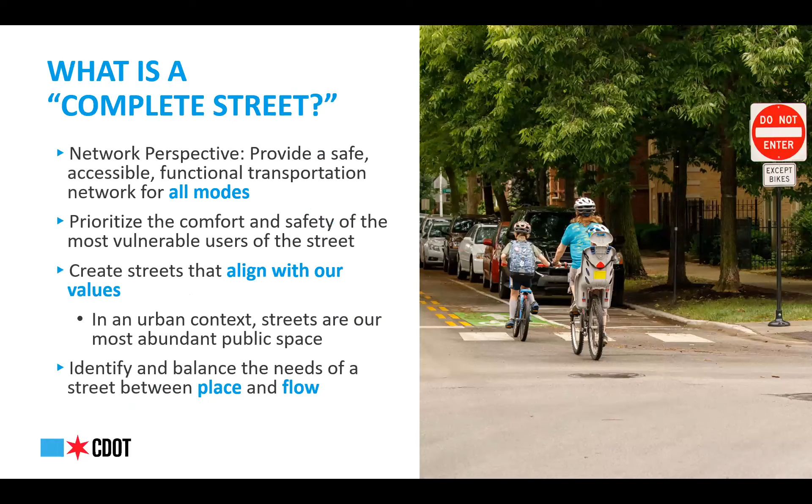So really important to note that even on your most flowy of streets, you still need to provide safe and functional facilities for all modes. And again, that doesn't mean that every street needs a protected bike lane. That goes back to the network perspective. But there should be an alternative that parallels a street if that's a desired path for people who are biking.

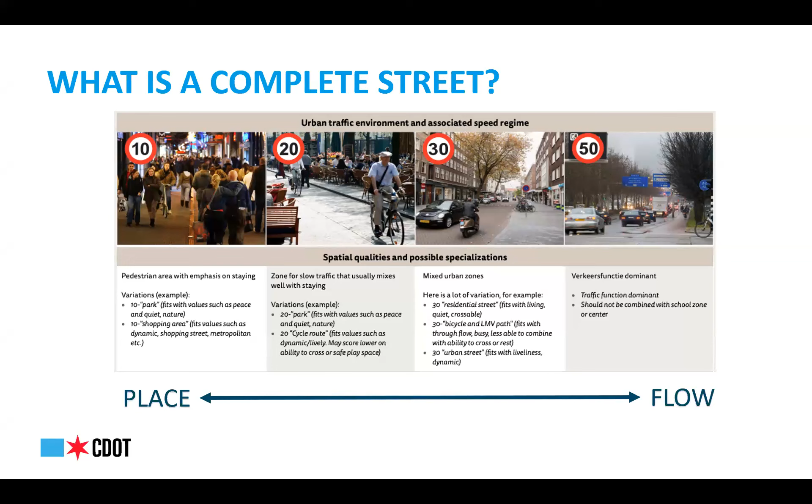So again, wanted to touch on the most important piece of all of this, which is safety, and a big reason that we are all here. Traffic fatalities and serious injuries are absolutely an epidemic in the United States right now. 40,000 people are killed by motor vehicles each year in the United States. That's data from the National Safety Council. On Chicago streets in particular, these numbers are a little outdated. This has gone up during the pandemic, back down, so it's right about where it is. But we see 80,000 crashes, 170 or more fatalities.

And something to really highlight is that while bicyclist mode share is only 1 or 2%, bicyclists and pedestrians make up 65 fatalities out of that 170. So you're talking about a third of fatalities from a mode share that's only 1 or 2%, which really highlights the vulnerability of those road users and the importance of focusing on the most vulnerable users of our street when we're designing.

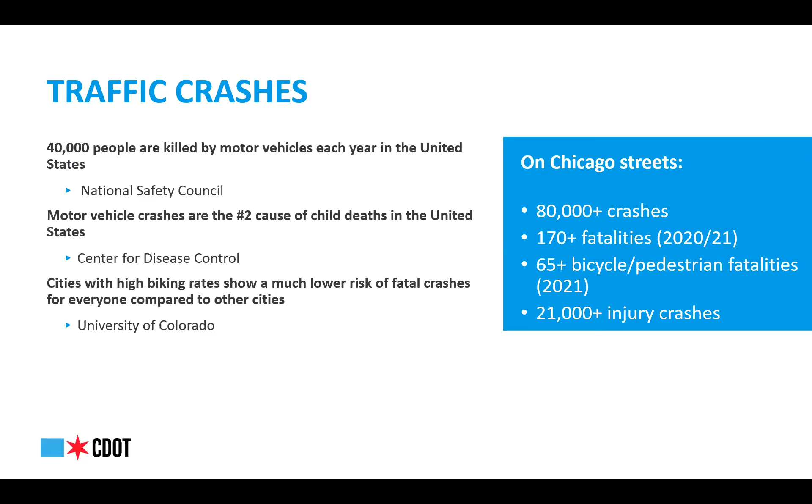But at 30 miles an hour, only 10 miles an hour faster, the odds of survival go down to only 55%. And when hit by a vehicle going 40 miles an hour, so only 10 miles an hour faster than that, your odds of surviving a crash are only 15%. Your odds of fatality are 85%.

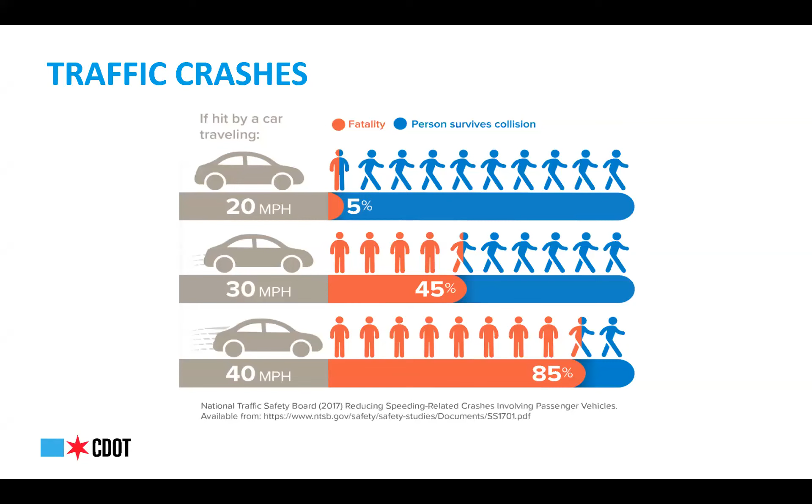And this is ITE, this is an engineering group, so I thought I could put at least one equation in here, some charts. But I really think that this, as you look at it and dig into it, really highlights why speed is so crucial and such a huge factor in the risk of fatality and serious injury. And, this is from the Good Street document as well, it helps understand the different families of modes and how they fit together, and how separating modes of vastly different mass and speed is so critical to street safety.

So kinetic energy, if you remember from physics class, is energy of a body in motion, right? And kinetic energy is directly related to the amount of force that a body has available to it to transfer in a crash. It's directly related to the risk of fatality and serious injury. And it goes up linearly with mass and exponentially with velocity. So the more massive a body is, the larger a car is.

And this is a huge issue, and one that on the street design side, we have less of an ability to control, as electric vehicles are great for a lot of reasons, but they're also much heavier than standard vehicles because these batteries are so huge and massive. And so vehicles are getting heavier even as they don't get bigger in size. Vehicles are also getting bigger in size. People are buying more SUVs, more trucks.

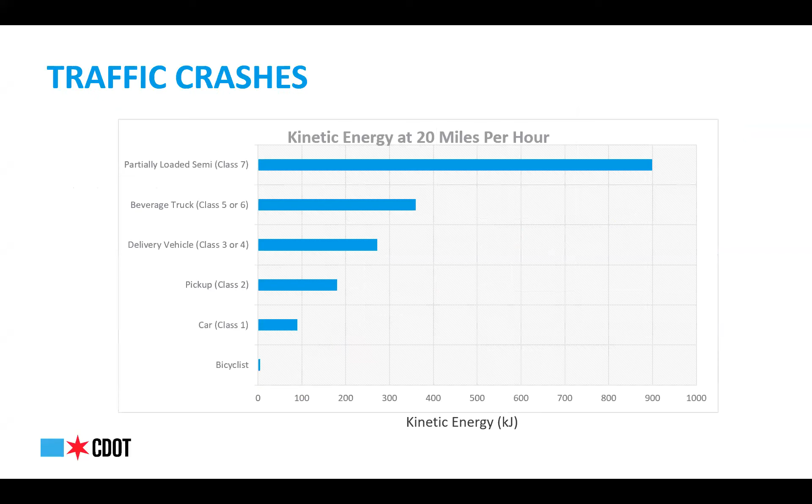So they are entirely different users and entirely different categories on our street, and we need to treat them that way. Again, both users deserve that safe, functional, accessible transportation system, but you cannot expect users of such different classes to be able to have a safe, efficient, accessible facility in the exact same way. It has to look different.

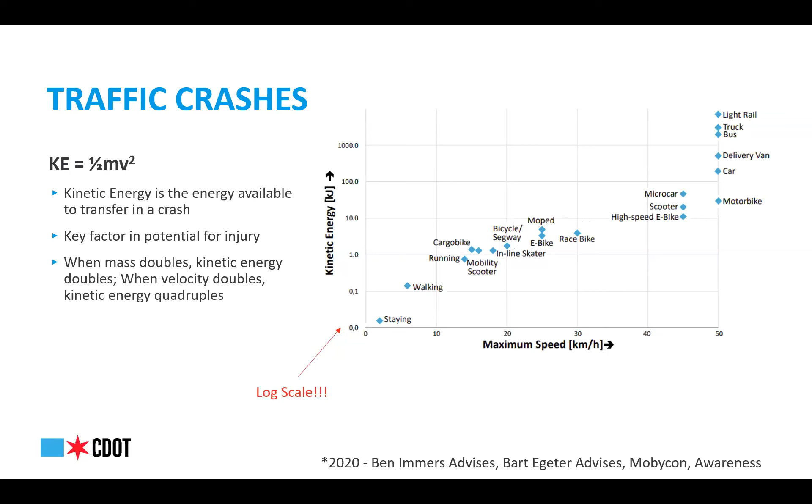Places where you're in conflict with pedestrians or bicyclists or other users of the street. And so we do that with raised intersections, or raised crosswalks, or the trusty old speed hump, which doesn't get enough appreciation, right? Very effective at doing what it does.

We can also do that with horizontal deflection, changes to horizontal alignment. So forcing vehicles to take tight turns around a traffic circle is going to slow them down. Chicanes, forcing you to shift to the left and to the right while you're driving on what otherwise would be a straightaway that makes you want to just hit the gas. Curb extensions that visually narrow the street and help encourage slower speeds and also shorten crossing distances for pedestrians.

And something, I saw Sid just walked in, he's worked a lot with us on this, but left turn traffic calming, which we've also referred to as a hardened center line. This forces left turning vehicles to take turns at a much tighter radius and reduces the conflict zone between pedestrians and left turning vehicles and increases visibility of pedestrians in the crosswalk as well.

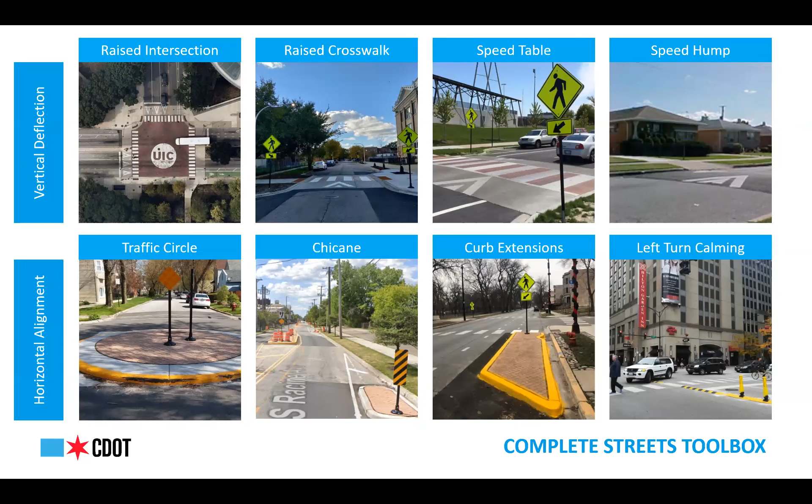And again, some of our speed feedback signs, or we also have speed cameras in certain locations, locations where otherwise with the design we're not able to narrow the visual field, or there's long space between crosswalks and control, whether it's signals or stop control, where it just encourages high speeds. That's where sometimes speed feedback signs or lowering the speed limit can be really impactful, in lieu of other improvements that might not be possible on the street.

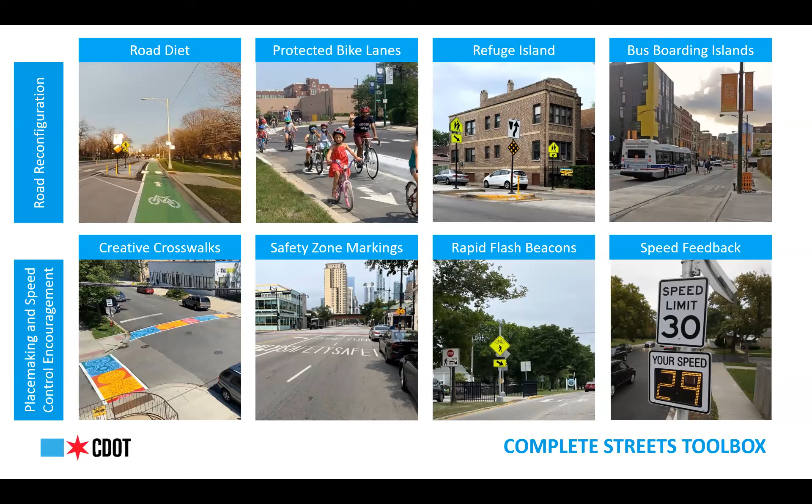So that's the intro on that. Any questions just off the bat on there, kind of the broad pictures? We haven't gotten into the details yet, but any questions on any of that?

All right, so let's roll on to kind of celebrating what we've done for 2023. I've got a couple of things I'll talk about and then turn it over to some of the folks on our team. So one thing I absolutely wanted to highlight, because this has been a crucial, huge push for our team over the past 2 years, is the upgrade of existing protected bike lanes that were originally installed just with flexible delineators in the bike lane buffer.

2 years ago, an initiative with the previous commissioner began to upgrade every single existing protected bike lane to curb barrier protection. And we are well on our way to completing that goal in what really has been a Herculean effort that is really unique to the city of Chicago. Other cities are starting to do this, but the quantity that we have done and the speed with which we've done it has been really, really amazing. And I just say thank you to our whole team and all the consultants who have worked on this. Many people in this room have probably touched some of these projects.

If you need me to pause, I can for the echo.

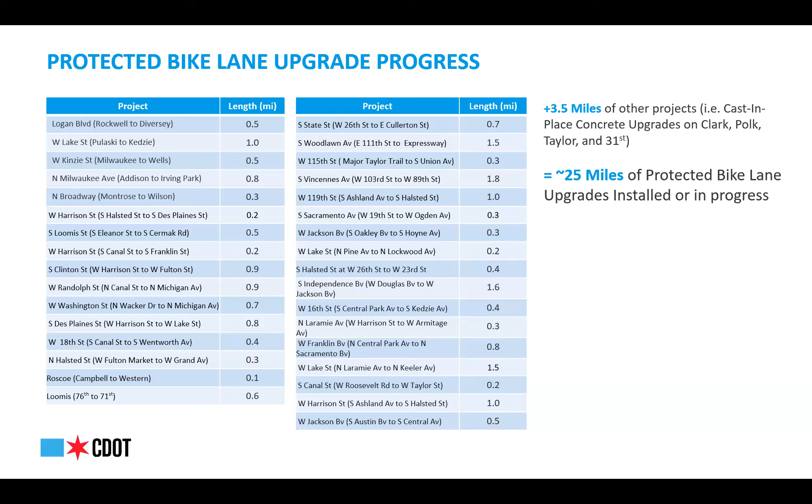So really this detail grew from conversations with other cities through NACTO groups, and then a little bit of trial and error on piloting. You see kind of our first design for precast curb.

We want to do something that we could have a single mold off the shelf and throw it out in the street really quickly and start evaluating. So the first 3 or 4 projects that we installed were installed with this type 3 curb pilot. I won't get into all the details, but we sort of refined the design over time.

You can see the high and wide drainage slot with a little bit of a thin shelf of concrete at the top of that slot. We found that if these were to fail or crack, that was where it was happening. And the most force that these are experiencing happens when they're installed and they're on the forklift. And so it was through that we redesigned these slightly, brought up this taper.

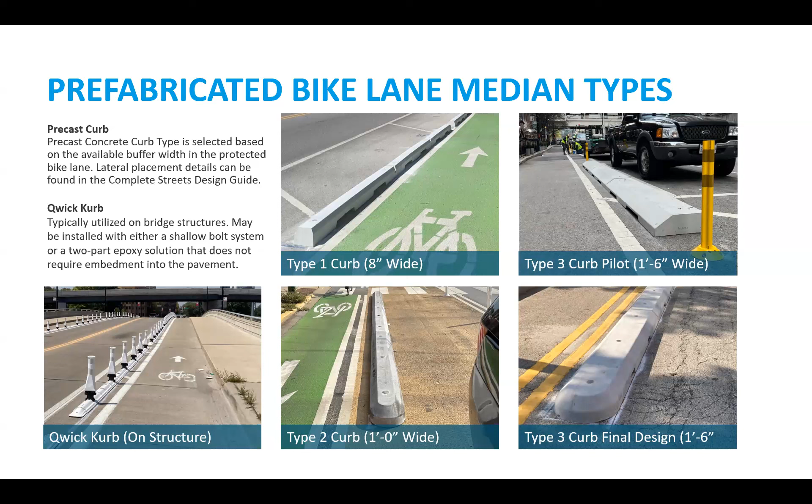They're not made to just be removed and replaced over and over again, right? So once or twice might work, but if they're damaged, they would need to be replaced if there's any utility work going on. And we have details for these that are available for people to use as needed.

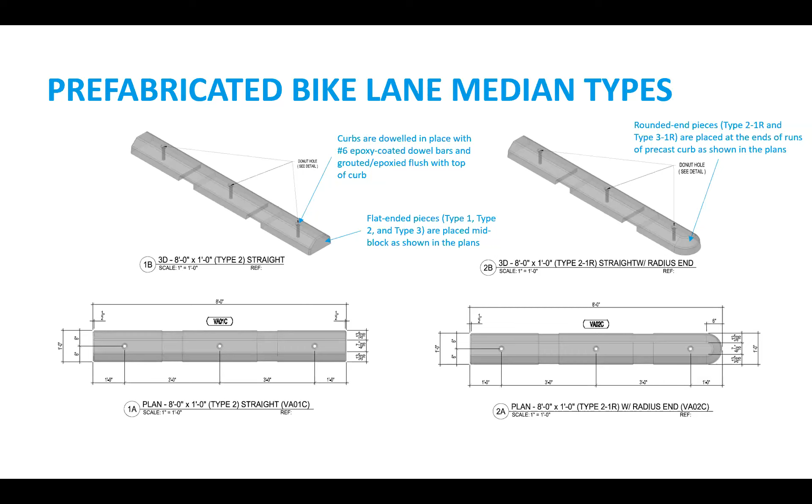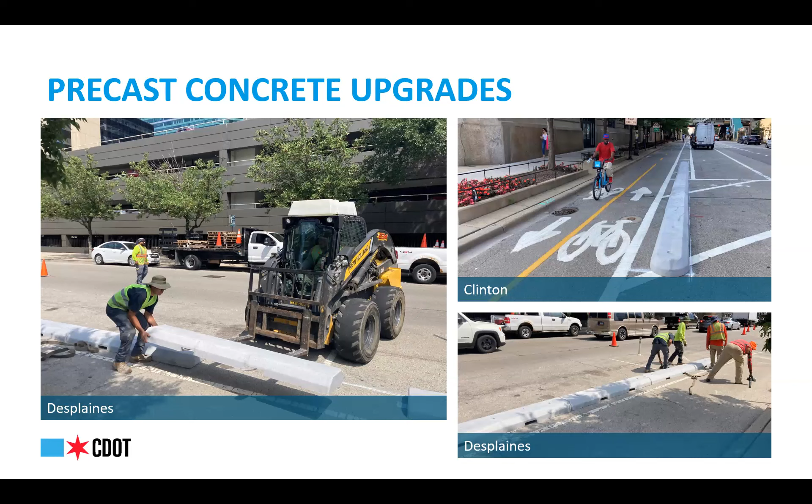And then I'll hand it over to Gina here to talk a little bit about some of the new projects and new protected bike lanes. Sounds good. All right, so as Kurt mentioned, we used precast a lot this year and last year to upgrade already existing protected bike lanes, but we also actually used precast to install brand new bike lanes this year. One of those being Kedzie Diversey to Elston.

What we did was swap the parking and the bike lane, so the bike lane is now curbside. And as Kurt was talking about before, our biggest effort is speed management. You can put up speed limit signs all you want, but they often get ignored. So the way to slow people down through pedestrian and safety enhancements is also to visually narrow the street. So by putting the parking lanes on the inside, it forces people to slow down that way.

We also did end up signing Kedzie as 20 miles per hour. And since we've done this project, we've already seen a 90% reduction in people going over 30 miles per hour, which has been huge to see. And there were also other pedestrian enhancements. There were paint and post bump outs, raised crossings through here as well. Kedzie was really important to have 2 major connections along the corridor, one of those being to Belmont, which Colleen will talk about in a little bit.

And then the other one was Wellington from Kimball to Kedzie, as you see on the bottom right here. This one is a neighborhood greenway that has a contraflow lane and a former slip lane that was converted into a paint and post bump out. And that connects you between Kimball and Kedzie.

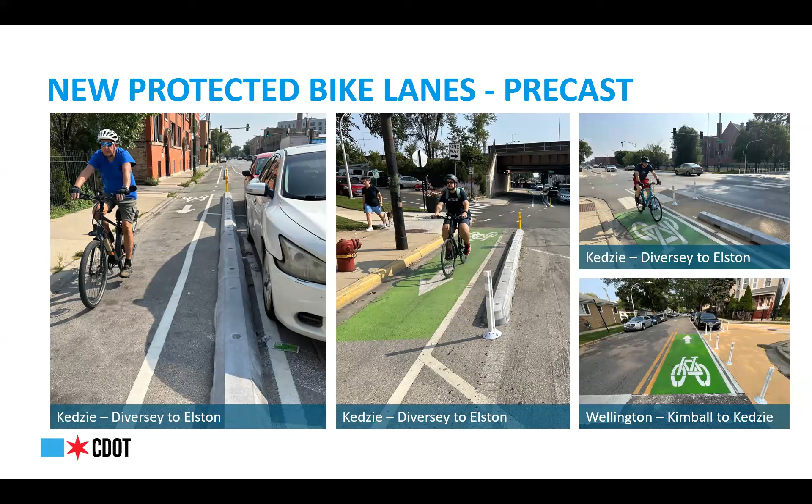And then another precast new project we did was on Augusta from Western to Milwaukee with an off-street connection to Elston. This was our pilot for a 42-foot wide roadway with parking protected bike lanes on both sides of the street. And we used type 1 precast concrete, the narrowest one, as Kurt mentioned. This included a reduction of speed to 20 miles per hour. Almost every unsignalized intersection has paint and post bump outs, and there's other enhancements on the street. This was a priority of ours because there are multiple schools and daycares along the corridor in this section.

Last year in 2022, our team did observations along the corridor, but especially at these schools and daycares, and found a ton of issues with double parking that was causing people to swerve around the parked cars, causing visibility issues, causing a lot of safety issues. And since then, after observations now that the street is constructed, we see virtually no double parking. We've seen a lot lower speeds, and it's been a huge improvement. So we're really excited about this one.

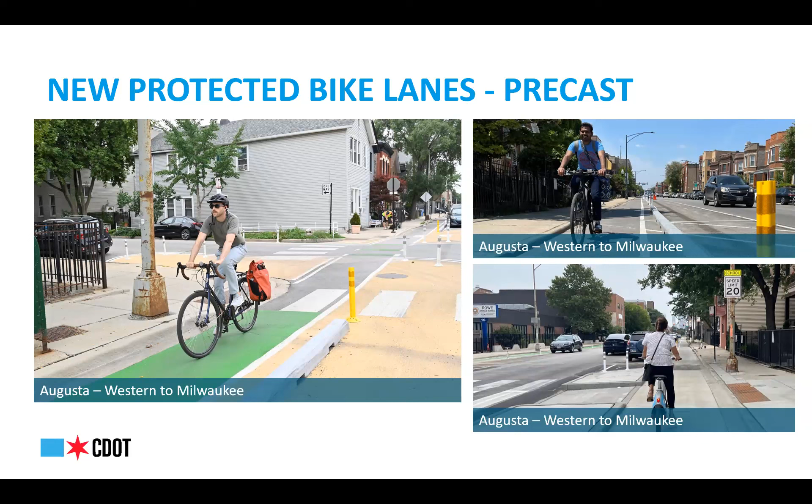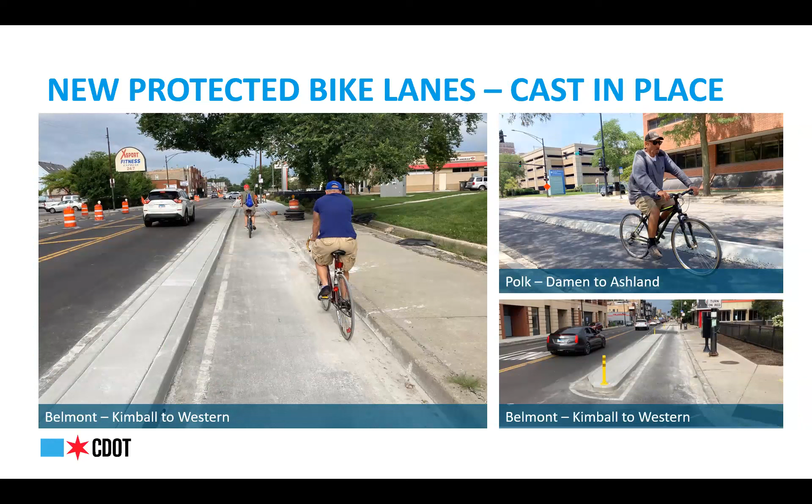We've also done a lot of rapid delivery pedestrian safety projects. Kurt referred to it earlier, and Sid can answer some questions at the end more about that. He's in the back. We've done a lot of paint and post bump outs throughout the city, both mid-block and at intersections. And we've also done left turn traffic calming through the use of rubber speed bumps and Qwick Kurb. Going forward, we'll be using more rubber speed bumps than the combination with Qwick Kurb. And in 2024, we're going to do a lot of observations at these locations to see if there's anything we can improve on.

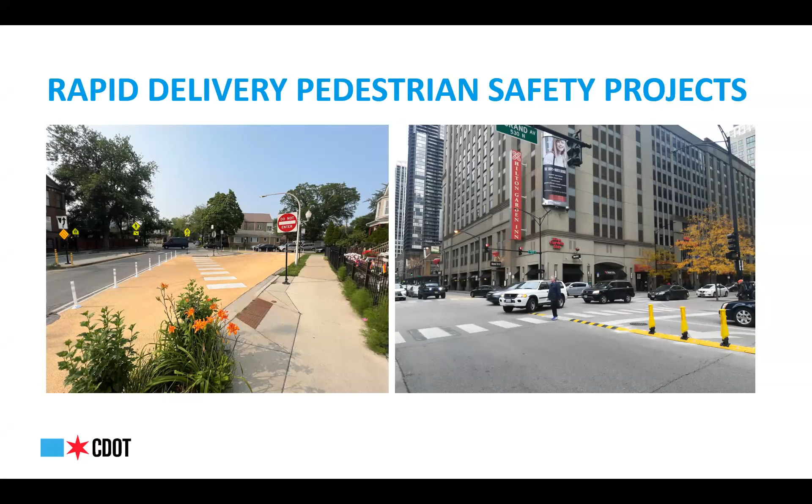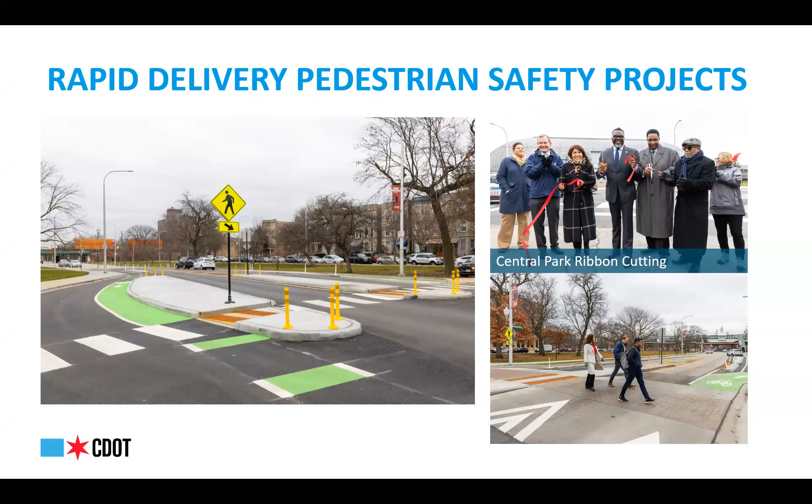Just on Monday, we had a ribbon cutting with the mayor and our team for Central Park. It was pedestrian and bicycle enhancements in the Garfield Park area on Central Park. And this included a raised crosswalk, connected bike lanes, refuge islands, more enhancements. It was very successful, and that area gets used by so many tourists, and there's so many people going through to see the conservatory and the park. And so this was very successful, and we're excited to get this one in as well. And I'll hand it over to Colleen to talk about Belmont.

All right, so Belmont is a project that our team has been working on and focusing on for the last 2 years. There were a lot of things in the existing condition on Belmont that made it stick out as a corridor in need of improvement, including its classification as a Vision Zero high crash corridor, its complex intersections, high speeds, and uncontrolled crossings. However, there was a lot to gain if we were able to make major improvements on Belmont. The River Run Trail connection lets out on Belmont, and the possibility of providing an east-west connection for bikes to get over the river, considering the nearest ones were pretty far away, would be major improvements to this corridor if we were able to transform the street.

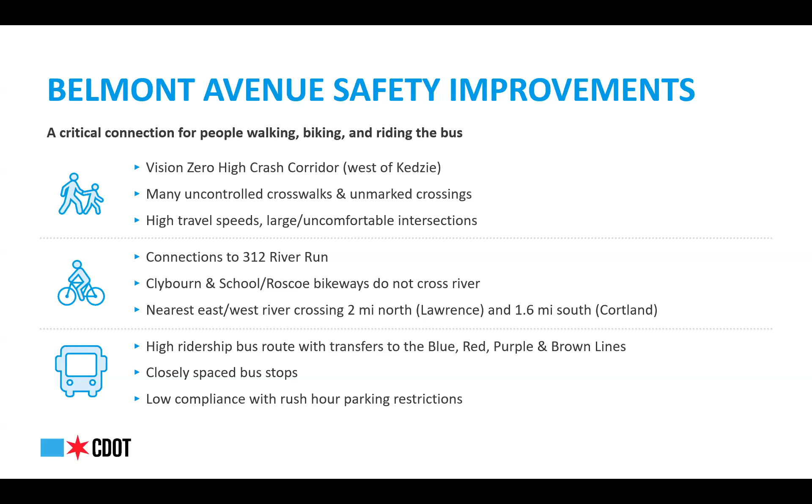And another challenge was that Belmont at Kedzie is underneath the Kennedy Expressway. So not only is it dark, but there's also a lot of cars entering and exiting the highway at high rates of speed.

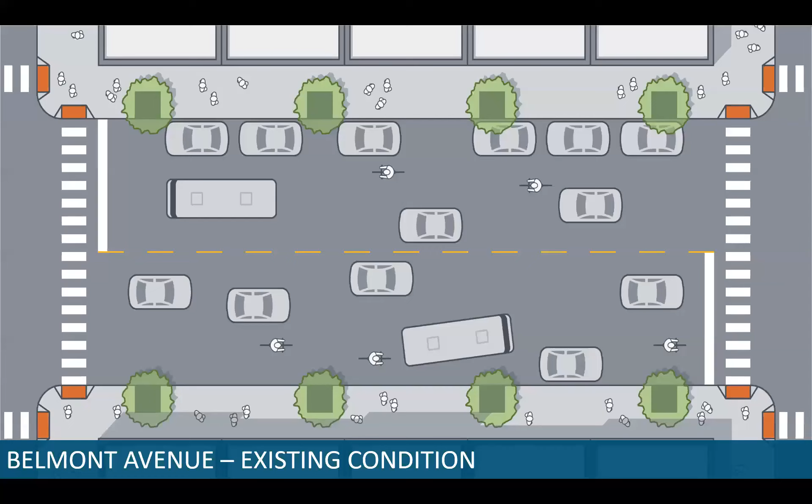So the existing cross-section of Belmont is 51 feet, and it's pretty much an undelineated space shared by bikes, cars, and buses. And we were able to transform it into a more complete street where bikes, buses, cars, and pedestrians are better served. There are concrete end caps and protected curbside bike lanes that help separate bike lanes fully from motor vehicle traffic. There are bus boarding islands allowing pedestrians to board the bus and encouraging slower speeds as cars wait behind these buses as they load and unload.

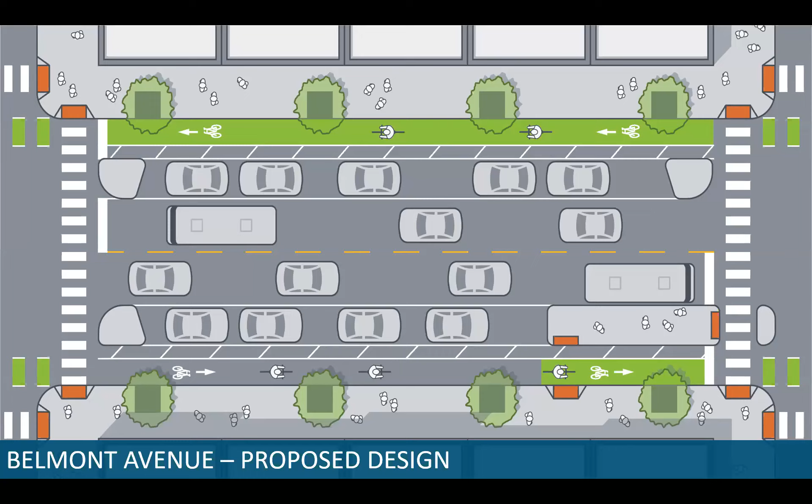Also, we have fewer and narrower travel lanes for cars that encourage slower and more careful driving, as well as actually lowering the speed limit from 30 miles an hour to 20 miles an hour.

Like I mentioned before, Belmont and Kedzie is underneath the Kennedy Expressway, so it's dark, it's busy, and it's confusing as a car trying to get through an intersection this large, let alone a bike. Also, as Gina just mentioned, Kedzie was upgraded to concrete protected bike lanes. So this was a perfect candidate for us to implement the first fully protected intersection in Chicago. There are concrete end caps and full stretches of curb that fully separate bikes from motor vehicle traffic.

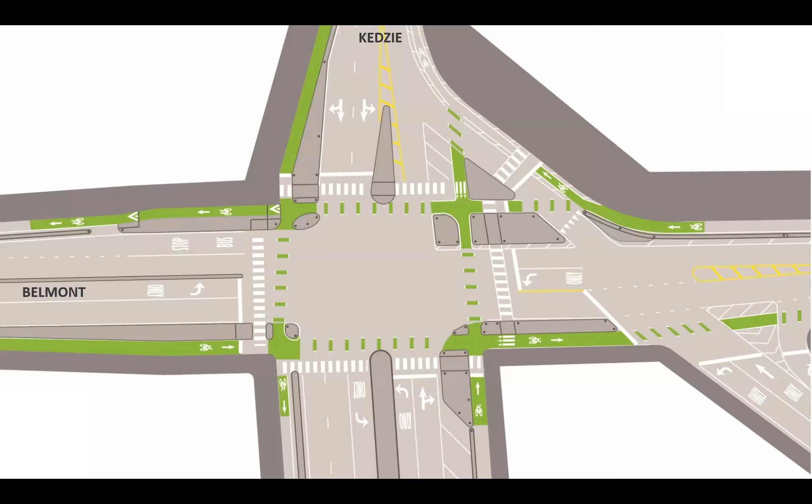And I want to point out that it was really important for us to maintain this as a connection, because an intersection this large to a less confident bicyclist might make the difference from them choosing to use Belmont at all. So we have seen a lot of success, and also a lot of people interested in us doing more of these treatments in the future.

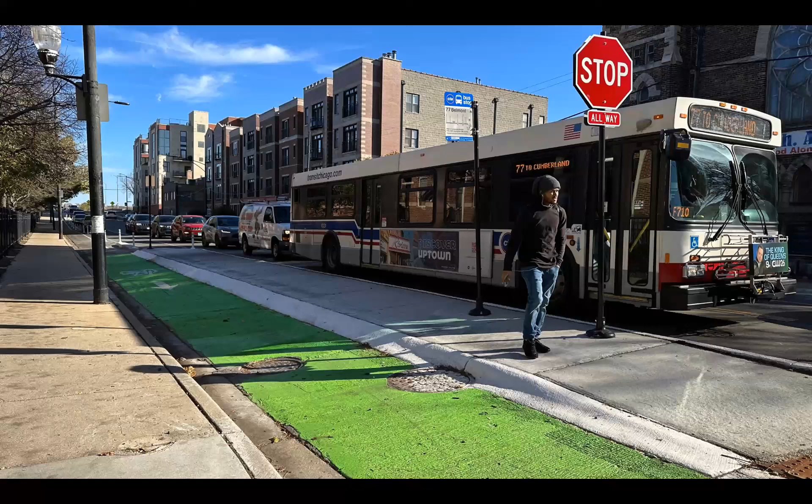We implemented about 7 bus boarding islands throughout the corridor on Belmont. And this provides pedestrians a space to wait for the buses, but it also has the secondary benefit of reducing the pedestrian crossing distance over that 51 total feet of Belmont. Also, I'd like to point out in this picture, on the bike lane side, the curb for the bus boarding island is mountable, which makes things easier for our maintenance equipment like snowplows to get through.

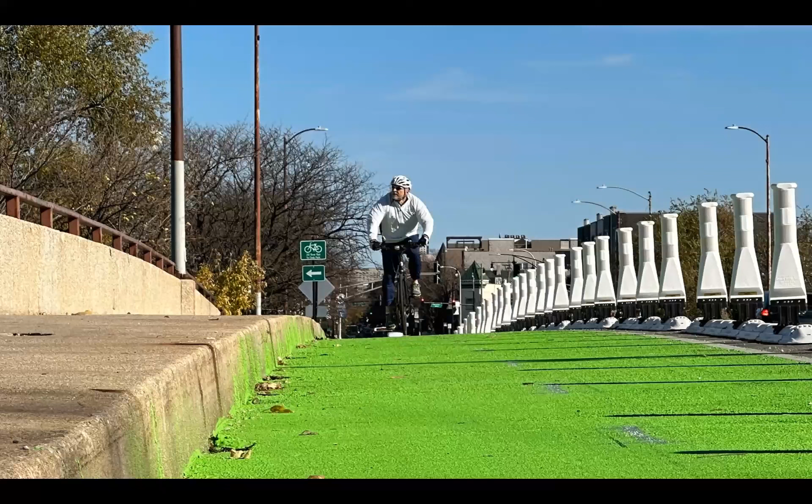We have a few sections of bus bike lanes on Belmont, especially at places like the Kimball Transit Stop, the intersections at Elston and California, and on the approach to Western Avenue. Finally, we have a short section of 2-way protected bike lane on Belmont over the section crossing the river. We have used Qwick Kurb, like Kurt mentioned, as a suitable alternative to concrete. And we've also provided a ramp for bicyclists to get from street level to sidewalk level to make this connection over the bridge. And with that, I'm going to open it up for any questions on the projects that we've done recently.

What's the design vehicle for Belmont? So Kedzie is a boulevard south of Belmont, and so we were able to use a smaller design vehicle. There's no trucks coming northbound on Kedzie there for that right turn, and that's actually why that corner is a little bit bigger. But the other design vehicles, I think we ran an SU30 as the design vehicle at Belmont and Kedzie, and I can't remember, is it WB50? I think it was 55. 55, yeah, okay. Because there are a lot of trucks coming off that. So the geometry of the departure and approach legs and it being 2 lanes really helped make that work.

We don't love big intersections, but it was big enough that we were able to accommodate the control vehicle without sacrificing the corner protection. We have a couple of questions just from the webinar part. We have 3, so let's just go through this pretty quickly.

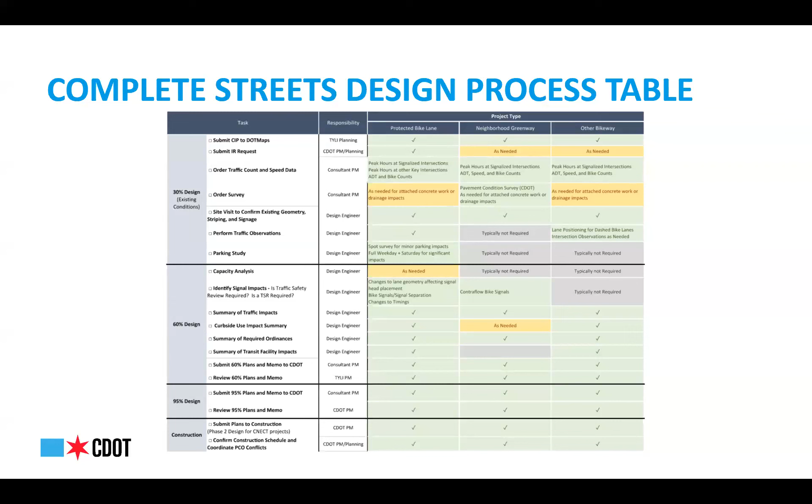One of the biggest things that we do in terms of coordination for any project is understanding the impacts to existing curbside use. Businesses often rely on undesignated curbside space for their access and deliveries, and that's not captured in existing signs or on the sign plans. So we recommend doing observations and data collection for all projects that are going to impact curbside use, so that you can understand how it's being used, especially for those undesignated areas. It's really important for the success of a project to understand these, because we work with the public and businesses to ensure that these needs are met and that we're completely capturing them all in the design.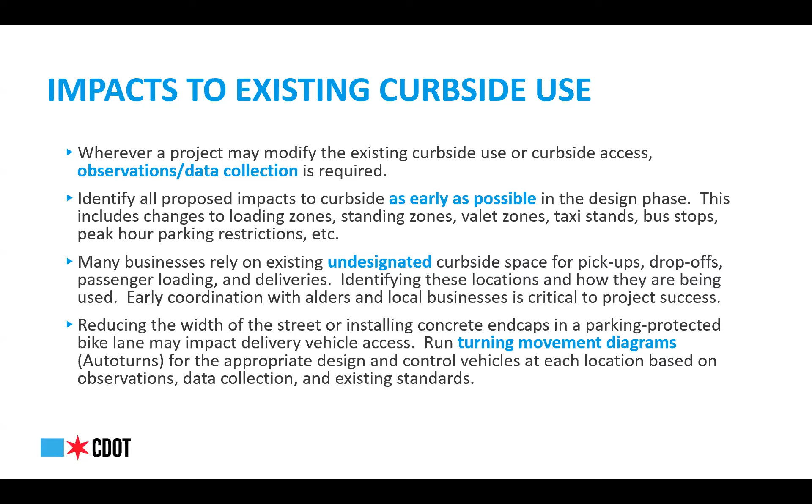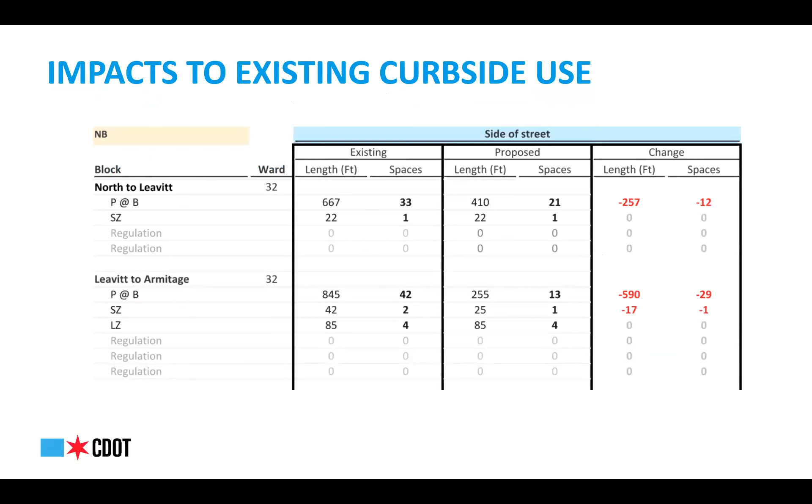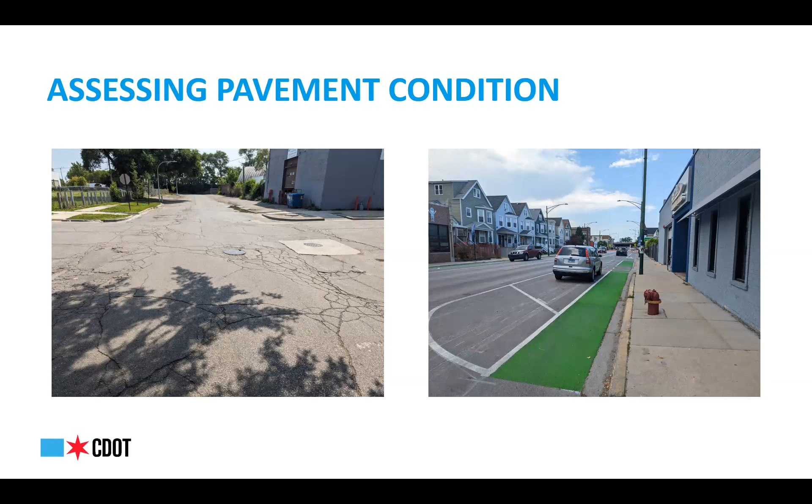CDOT also has a bike parking program that's led by Riley in the back. If you want to wave, that's Riley. It started in 1993, and we have anywhere between 15,000 to 18,000 bike racks in the city, which is huge and one of the national leaders in any one city.

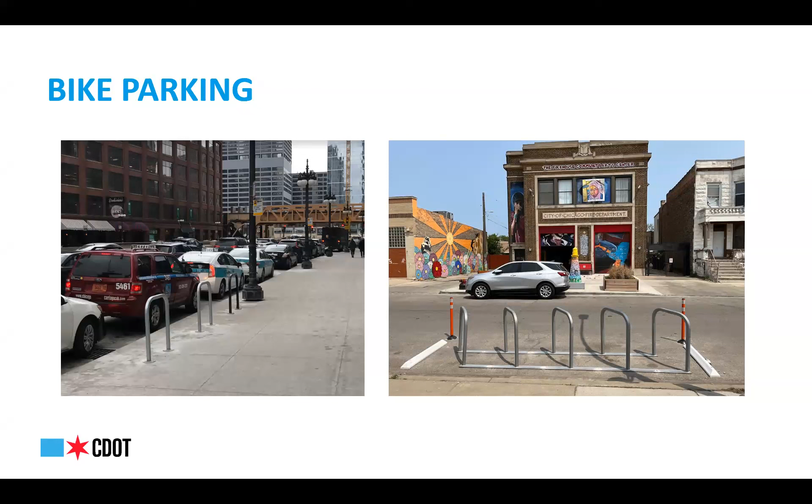And we've been working to install about 400 new corrals and racks every year. And a big effort of those recently has been the placement of these corrals. We've been placing them in areas of no parking, as you can see in this photo. And the benefit of that is to prevent illegally parked and idling vehicles that often use these spaces. When they do use these spaces, it blocks visibility and creates safety hazards. So putting the bike rack here is really helpful for that.

You just have to be mindful of the placement of it, especially for utilities. It can't go within 1 foot of a manhole and utility lid, and it can't go within 15 feet of a fire hydrant.

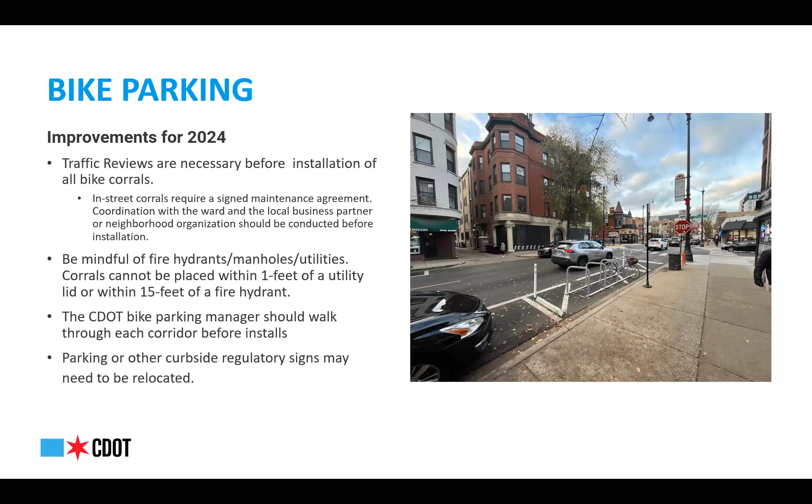Oh, hey, back to me.

All right, something else that came up pretty recently that I wanted to go over this meeting with CDOT materials on this is we've been doing a lot more cast in place protected bike lanes. We've also been doing a lot of narrow protected bike lanes on narrower corridors. This 6 foot minimum clear width from face of curb to face of curb, that is our standard that you'll see over and over in some of the details that we're going to talk about. So always keep that in mind.

That is our clear width to allow our maintenance vehicles to be able to get into the protected bike lane for sweeping and snow plowing. So that minimum clear width is a really important dimension. But the other really important dimension is the minimum width from edge of pavement to edge of pavement. So the preferred surface material for any bike lane in the city is HMA, right? Asphalt is going to have a much cleaner, smoother ride. You don't need to worry about joints in concrete. So our preferred material is HMA.

With that said, this was definitely a lesson learned the hard way: a lot of the contractors in the city of Chicago, the minimum width that they can pave with existing paving equipment they have is 5 feet. So if you had a gutter pan on the bike lane median side for any reason, there's a drainage issue or something, that distance from edge of pavement to edge of pavement still needs to meet that 5-foot minimum width. So that's just something to bear in mind if you had a 1-foot gutter pan here and 6 inches here. Well, now this is going to need to be 6.5 feet to be able to get you to 5 feet here.

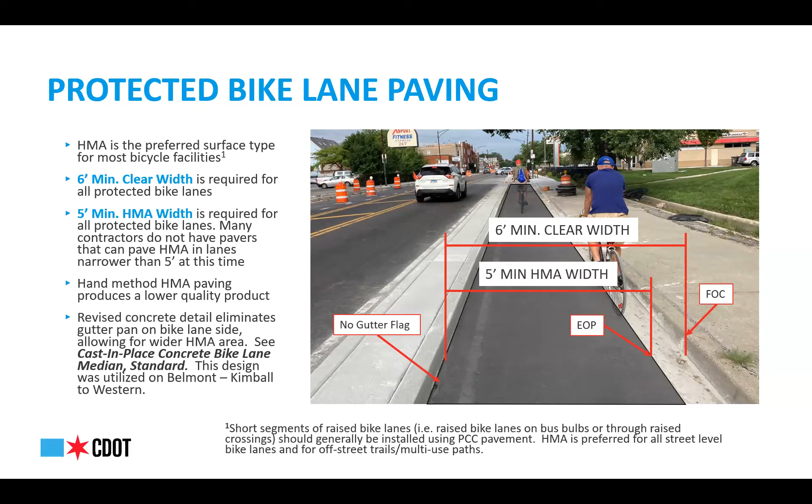Something else that's come up on a lot of projects and something that we've been talking with forestry on is that where we can, and it's sometimes challenging with a lot of rapid delivery projects, challenging with utility impacts and going through the OUC process, which I'm going to talk about in a minute, but where we can, we really want to maximize pervious area. We want to maximize landscaping. We want to maximize the amount of grass space that we have. Wherever we can avoid just creating a sea of concrete, if we're doing a big bus boarding island or big bump out, especially with attached curb extensions, if there's existing grass landscaping or parkway, we just want to extend that grass parkway. We don't want to fill that in with concrete if we don't have to.

The big key, like I mentioned, is utility impacts. If you're going through the OUC process, if you have a water main under new pervious area, that can be sometimes not allowed by DWM. So you may run into that in the OUC process, but we always want to start from a place of adding as much landscaping as we can on these projects where appropriate.

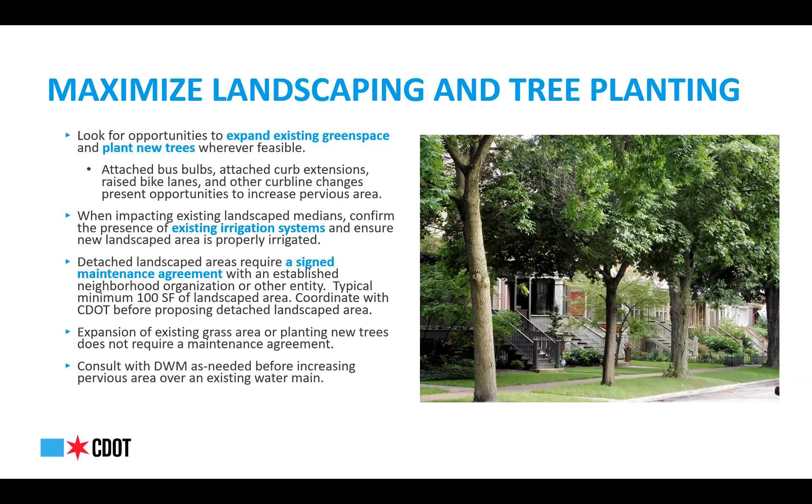And same thing with tree planting. If there's an opportunity or if there are locations where there used to be trees and there no longer are, and we're coming through with a large corridor project, it's something that we want to keep in mind. Again, it's been kind of challenging on the scale of a lot of our projects, but it's something that we want to be doing more of going forward.

And then I see Tyler in the back. So this is another one where if you have questions on this, you can ask him as well. But I wanted to give a little bit of an overview of the signal upgrade and signal modification process, particularly because on the Complete Streets side, we have been doing a lot more signal work and have been finding a lot more need for signal work, whether that's dedicated bike signals or bike signals for signal separation of turning movements across a protected bike lane.

Or maybe a one-way street with a contraflow bike lane where we want to install a dedicated bike phase for that contraflow movement. There are a lot of opportunities for really impactful signal improvements. But for our team, we hadn't been doing a lot of that in the past. And so we really learned a lot about this process, how to streamline it, how to do it right. So I wanted to give the very general overview and know that there are many more details to this. And Tyler, you can correct me if I get anything wrong here.

But in general, once you have a concept for what you're going to do at a particular intersection, you're going to put together a traffic signal requirement plan, or TSR, and that is reviewed by traffic safety. So that's Tyler in the back and Udola, who I think might be on the call. So they will review the traffic signal requirement plan. This shows locations of signal heads. It shows your proposed phasing.

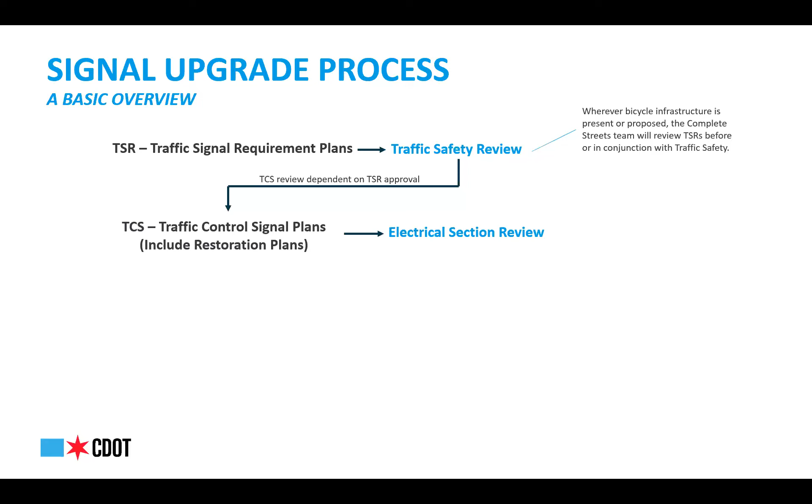So once the TSRs are approved by traffic safety, you can then submit the TCSs, that's traffic control signal plans, to the electrical section. So the TCSs will show all of your new and proposed cable and conduit, all of those details. We include restoration plans for the OUC process, which I'll talk about, but that's the next step in the process, and that goes to the electrical section. Once the TSRs and TCSs are reviewed and approved, you're in business. You're doing great. Then at that point, you can submit the timing sheets, which go again to traffic safety.

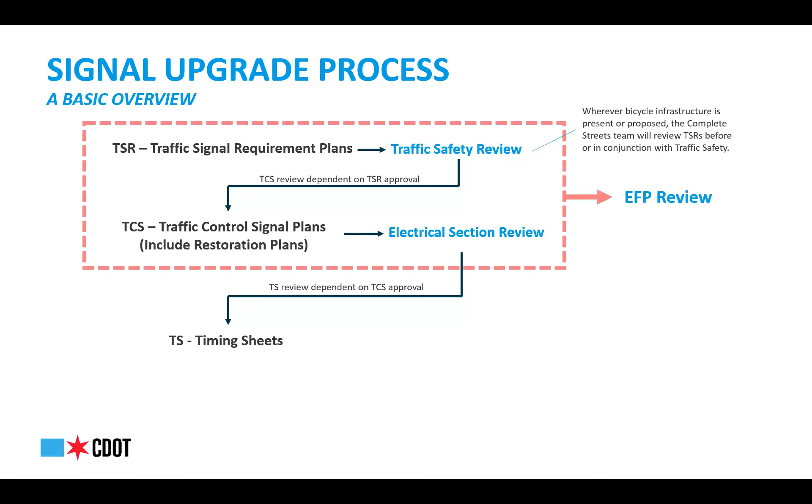And then if you are replacing any foundations or installing new foundations or installing new conduit, anything that requires any excavation, if you're doing underground work, the TSRs and TCSs have to go into EFP review in the Office of Underground Coordination, which many of you are probably familiar with, but I will talk about it. So once you work through the EFP process, you get permit issuance authorization, so you can actually do the work. And then you want to make sure that your timing sheets are approved by traffic safety.

These two things can happen in parallel, but you want to make sure that these timing sheets are reviewed well in advance of this work getting started or as it's getting started, because DEO will take those timing sheets and it takes a couple of weeks to test those timings before they're able to actually get them out in the field. So it's really critical that as soon as you have TSR and TCS approval, if you need to go to EFP, do that right away. And you always need to do the timing sheets, do that right away. So that's kind of the process. And then ultimately that leads to new signal equipment and timings out in the field.

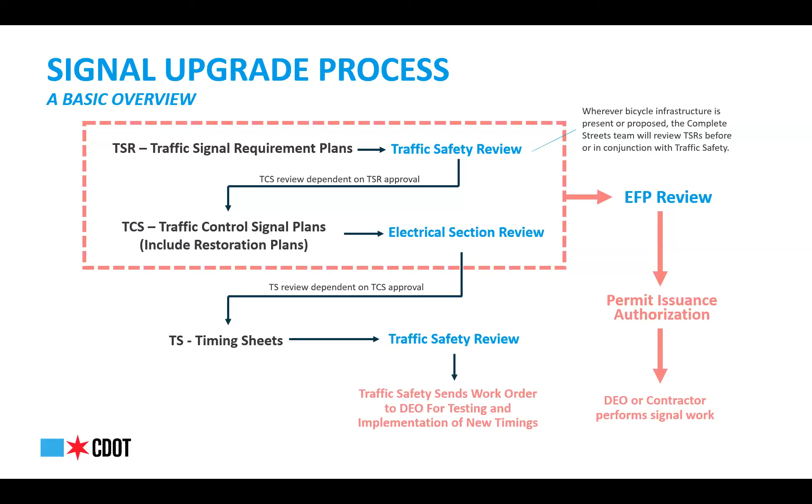So this could be a whole presentation in and of itself, but I'll give you the briefest version here if you're not familiar with the EFP process. So any work that you're doing in the city of Chicago that involves excavation needs to go through the existing facilities protection process, which is through the Office of Underground Coordination, or OUC.

The key lesson learned on our end and the key piece to remember for projects that you're working on for CDOT is that you really want to identify any locations that are going to require an EFP submittal as early on in the design process as possible. Because this review process involves 20-something agencies, and it can take several months to approve a project in OUC, in the EFP process. And you cannot start underground work and pull your permit until you have EFP approval.

So it's really critical that these types of locations are identified really early on in a project and submitted for EFP as early as possible. And then constant communication about the status of these projects in EFP and really, really strong design plans that are well detailed, well QC'd, are going to make that EFP process much smoother, because you don't want things to come up in the EFP process that maybe you didn't think about when you were originally doing design.

And we'll share some of the slides. I've got the URL down here if you want to read more about the EFP process.

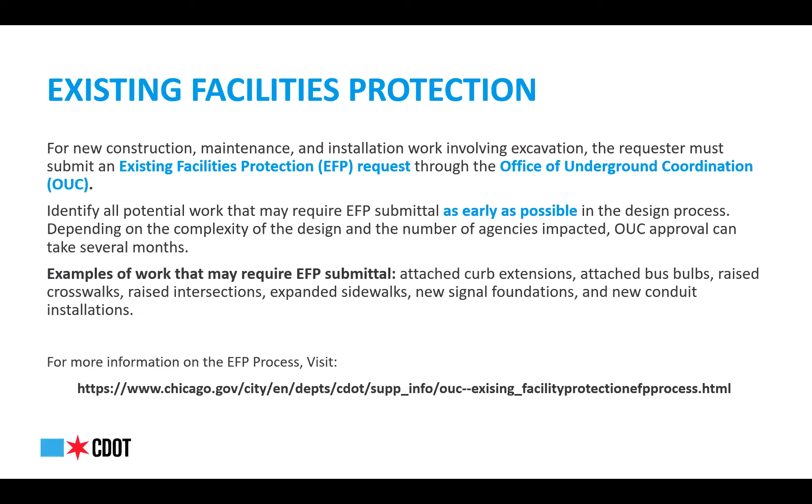So the other thing I really wanted to mention here is design and control vehicles. This is something that we've been talking about and working on a lot on the CDOT side in thinking about making sure that we're using the appropriate design and control vehicles for the context. And we have some guidelines that we've developed and ultimately will share with folks, once we're completely done. It's draft now, but I think we're really close on that. But I want to emphasize that they are guidelines, and I want to talk through sort of the guiding philosophy on design vehicle selection.

So just in case you haven't heard these terms before, a design vehicle is the frequent user of the street that's going to dictate your minimum required turning radius. The design vehicle typically should not encroach into adjacent travel lanes. It may sometimes in certain instances, right? Again, guidelines. Every street, every intersection is different. But typically should not encroach into adjacent travel lanes, particularly travel lanes in the opposite direction.

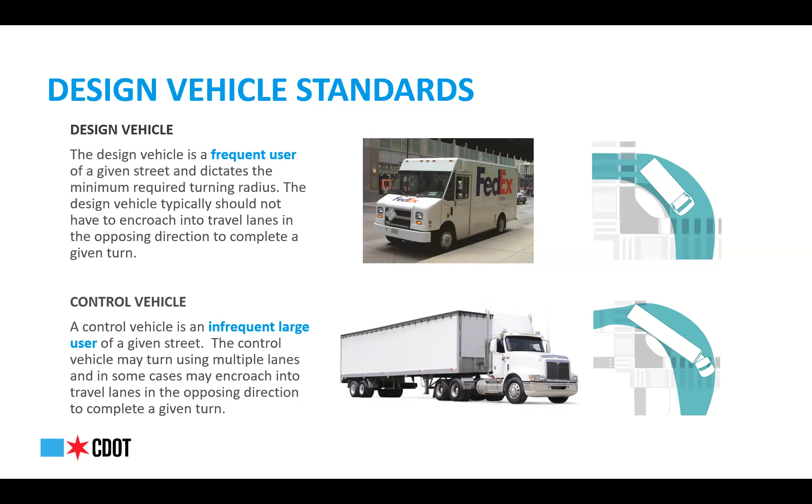Control vehicles, on the other hand, are infrequent large users of the street. And control vehicles may turn using multiple lanes and in some cases encroach into lanes in the opposite direction. So we use both of these to study, all right, do we have enough width for emergency vehicle access in the rare instance that we need it? But are we also making sure that we have a right-sized intersection that reduces speeds and is safe and comfortable and accessible for all users?

So, as I already said, and will emphasize again, pay close attention to the context of the street when selecting a design vehicle. What we don't want people doing is just looking at the table and saying, all right, this is an option, I'm going to apply it here because it's one of the options. Land use is particularly important, and I'll get to that in a second. Functional classification is a nice guide, but in an urban mixed-use environment, it's not the be-all end-all.

It's particularly important, and this also goes a little bit back to curbside use too, and those observations we talked about, to identify where existing businesses might require large vehicle access that we just don't know about by scrolling in Street View. Businesses open and close all the time. Businesses have different uses all the time. And you may be able to get some of this in Street View too by seeing where there's a loading dock that you're not expecting that connects 100 feet away from the driveway that's actually on the street.

And oftentimes, we found that large trucks are using the entire width of an existing street just to access a driveway. And we're proposing protected bike lanes. And those things aren't incompatible, but they require careful attention and detail and design and conversation. So they're the kind of things you want to be thinking about in these projects.

That said, we are looking for the smallest possible standard curb radius to be installed at all corners of all intersections. So we don't want to choose a design vehicle that's too small for what's already using the street, but we absolutely do not want to install curb radii that are way too wide that encourage unsafe, faster speeds. And you can accomplish some of this by just observations or even just traffic counts by vehicle classification to understand what types of vehicles are using a particular intersection or driveway.

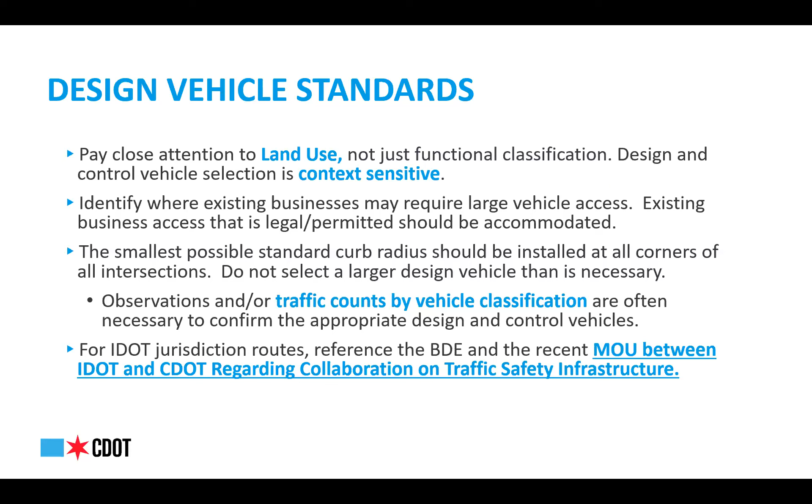And the last thing I'd mention too is be sure if you have a project that is receiving state or federal funds that you're using the appropriate design guidance for that. It may require use of the BLR, even if it is a local jurisdiction street. Don't assume that it does, but it might. Check.

So this is something that's been really important for us to be able to get some robust, excellent traffic calming improvements on especially our protected bike lane projects: use of the DL23 design vehicle. I think a lot of people used to the BLR, the BDE, are used to the SU30. That's sort of the smallest IDOT design vehicle that they use. And this is another thing that can get lost in the pages, just how big an SU30 is. It is a big ass vehicle. It is very large. A DL23 is your standard FedEx, or the Amazon vehicles might actually be a little smaller. They got some varied sizes.

But your standard delivery vehicle that, again, is this definition of a frequent user, is typically going to be that DL23. And we've really used this on local to local intersections and some other locations where we know there's not a lot of heavy vehicles. We're really pushing to use this DL23 when needed to support the complete streets infrastructure that we're proposing. Again, not in a vacuum. This is all context sensitive, and we want to make sure we're maintaining access for existing vehicles that are using a given intersection or street. But this has been a really powerful tool, especially when it comes to protected intersections, to really expand our toolbox.

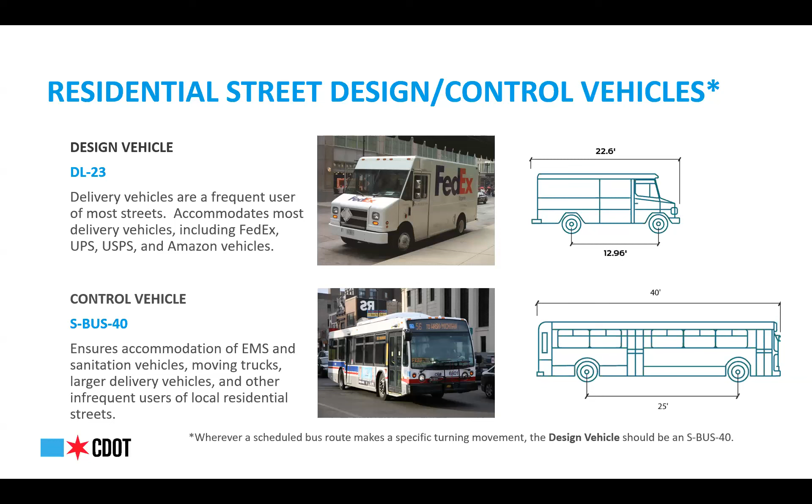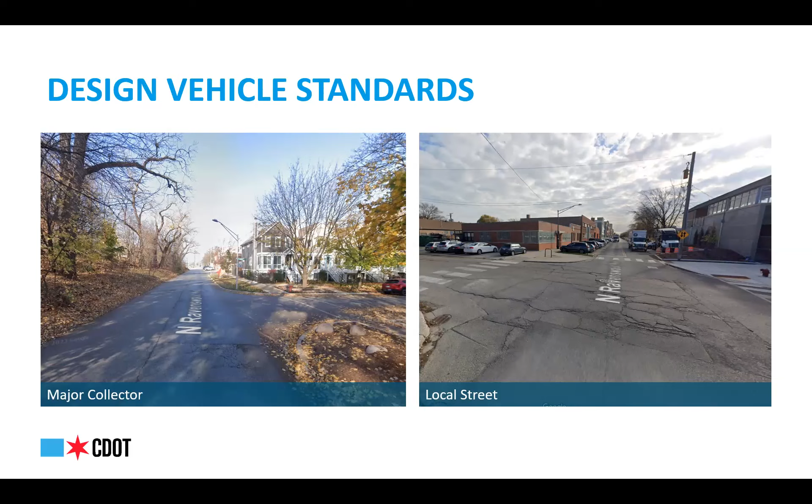That said, I will finally show you the table. So again, this is draft, but this really gets at using what people are already very familiar with, which is functional classification, and using that as a starting point to give you guidance on what design and control vehicles to use. And if you put this up against what you'll see in some of the IDOT standards, these are much smaller design and control vehicles. And it's very intentional. It also gets back to a little bit of that place to flow purpose of the street. Many IDOT streets are not going to fall into that place reason for being, right? They're more flow streets.

And again, doesn't mean they don't need to be safe and accessible, but there's a little bit more of a reason for the larger design vehicles in that context. But local streets, local jurisdiction streets, we really want to minimize the design vehicle size to the extent possible. So again, this will be coming soon. We will share it, I promise.

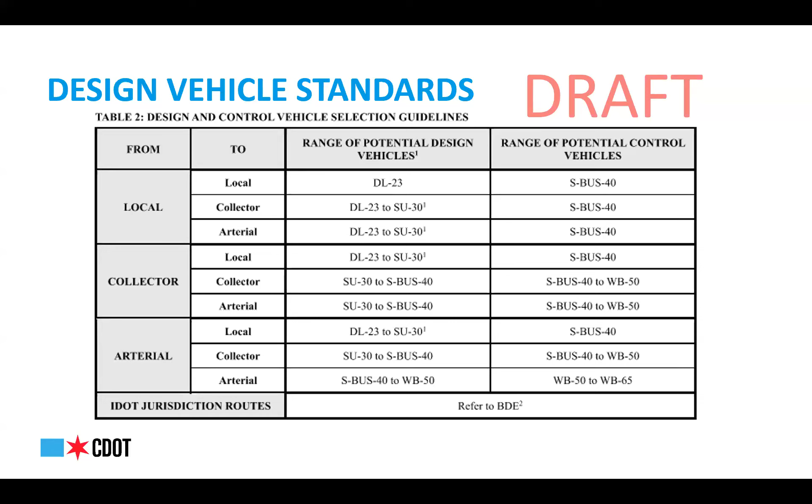And then this, I won't talk too much about this, I already mentioned it, but just a note that the PROWAG final rule was released and we are expecting MUTCD updates. On the website, it actually still says by the end of the year. I would not hold my breath. I'm assuming that's going to come next year, but just an FYI.

And then I'm going to hand it off after just one more slide here, but really wanted to set up this Complete Streets Design Reference Manual. And then Calvin, you'll finally get to hear from, talk a little bit about how it's used. But again, this is the same thing you've been hearing me say. We've kind of compiled all of these details and standards and references to help guide design, not do design.

And there's a lot in here that shows example streets, and no street that you're designing is probably going to look exactly like the street that's in these guidelines. It's meant to be used for just that reason, as guidelines. It documents a lot of the critical design constraints, like minimum widths we talked about, minimum lane widths in different contexts, that I think are the kind of things that people have been yearning for, want to know, like, all right, what's the smallest I really can go? This has got this. So I think that's really going to be helpful, and we'll talk through those things.

But at the end of the day, we are designers, and nothing in the guide replaces the need for thoughtful, context-sensitive design. The other thing I really wanted to say too is I happen to work for CDOT, and we happen to have an in-house team that is here all the time. But that is just the role that I have and the badge that I wear. There are a ton of really, really smart, talented engineers and people of other professions in this room that have a lot of expertise. And everyone is an expert in something, but no one is an expert in everything. I certainly can say that about myself. So I just wanted to say, talk to us, share that expertise.

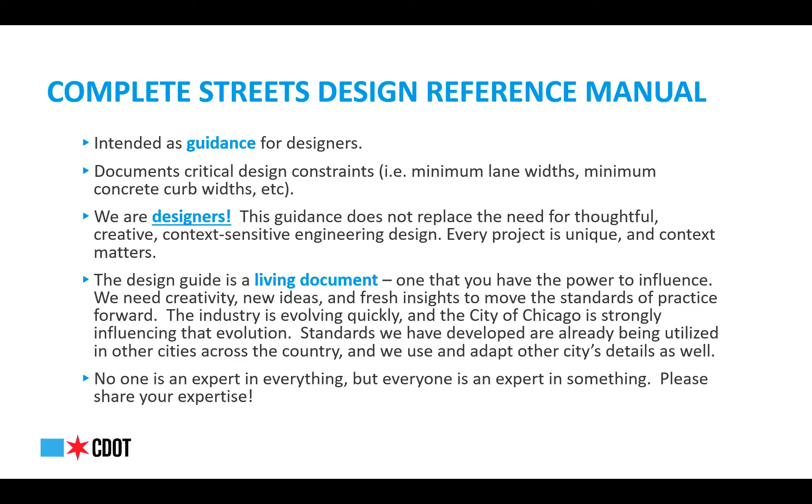And so I just want you to remember that as you're reviewing this guide, not taking it as someone else's gospel, but really as something that is a living document that can expand and change. And we don't want this to in any way stifle the creativity of all the really smart people in this room. And with that in mind, I'll hand it over to Calvin Graham to talk through the guide.

All right, so for some of you, this is the meat and potatoes because you're going to use this every day for the next, I don't know, 5 years. For some of you, it's just potatoes because you'll never look at it ever again. But one of the struggles we've had in the past with our standards, with our guide, is that we kind of were adding things as they were needed. Oh, now we're doing a protected corner, let's add that somewhere, and it was just kind of appended to the end, which is great because we had all the information, but not necessarily the most structured.

So one of our goals with this version of the standards and these guidelines is to structure it a little bit better, allow for room to grow in the next couple of years. So it is currently divided into 11 sections with 3 appendices.

I kind of grouped them by color here, only just to kind of say how they function, how they work. The first 3 that are in orange are general guidelines, things like those minimum lane widths, things like general pavement markings, things that you're going to use on almost every project if you're designing a complete street.

Second is some specific, context-specific guidelines. So for specific bike lane types, like neighborhood greenways or protected bike lanes. And then also getting to specific intersection types and how we can treat intersections.

Now the third section is kind of a grouping of a couple different things. A lot of our work is in collaboration, as Kurt and Gene have mentioned, with the arterial resurfacing team, in collaboration with CTA, so many other stakeholders. And so these are kind of chapters that rely a lot on that collaboration, and so they don't necessarily fit within a program that's only a neighborhood greenway. And so that includes transit facilities, that includes raised bike lanes that are often in collaboration with CTA, that includes traffic calming, where we're working with traffic safety, traffic studies, alderpeople.

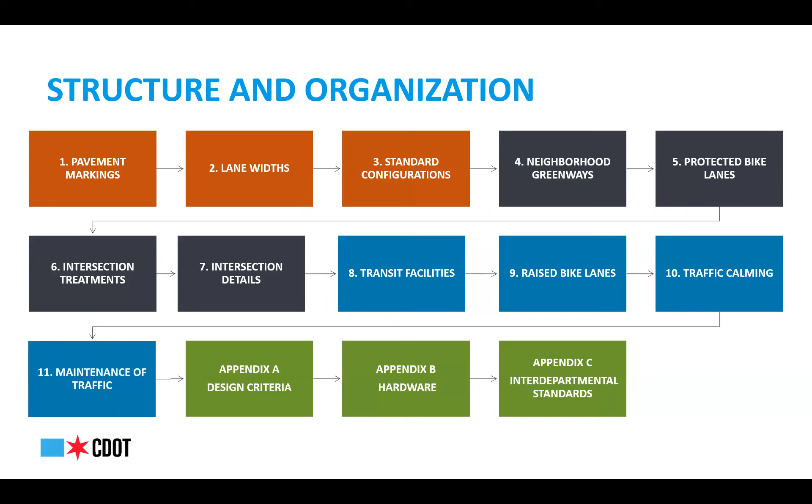So the sheet naming, we have a lot of acronyms in engineering. I'm adding one more to your repertoire. The CS just stands for Complete Streets, nothing more, nothing less. So each sheet is labeled as this CS and then a section number and a sheet number. The reason we did it this way is just in the future, we are looking at maybe yearly updates to this. It's easier to append one sheet to the end of a section than to renumber 50 pages because we added one more precast curb detail. And so really hoping that this kind of allows us to build moving forward.

Another general thing I want to talk about is the use of notes, kind of a convention we used. Some of the notes will be circled, some will not be. It wasn't just whether we felt like circling it or not. We did actually have some logic. If it's not circled, it's a general or a clarifying note. What I mean by that is it's either general, it just applies to the entire sheet. So in this case, all lines are 4-inch solid white unless otherwise noted. I'm not going to point out a specific line and call that out. So it'll apply to everything, or it's a clarifying note.

Maybe we have a call out, but we'll say like see note 3. We just want you to take maybe a second look, a little bit further detail. If it's circled, it means it's just called out in the drawing. Simple as that. Every circled note might just be a really long call out. It might be a call out with nuance. It might be something we want to draw a little more attention to than just a random call out on the actual drawing.

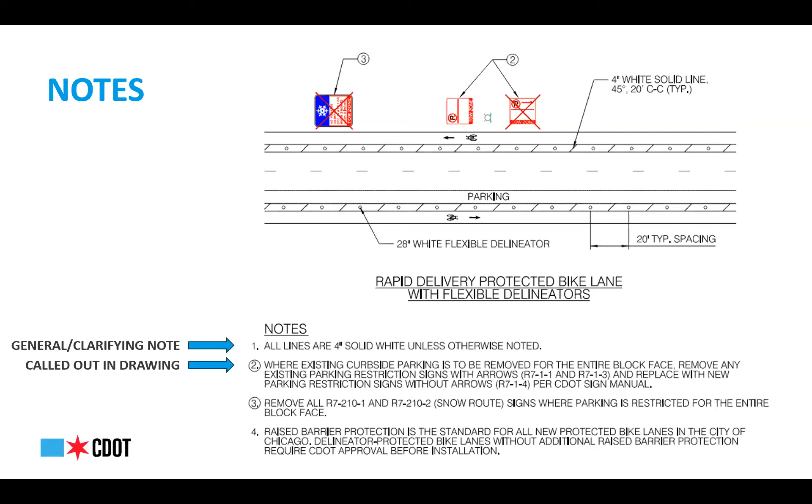So one of the new or improved sheets in these standards is some standard cross sections, which we built out just a little bit better. So this is classified by street width. So we have between 42-foot and 52-foot wide streets, which is really the majority of larger streets and standard streets in Chicago. And the goal of this is just to, first glance, you got a project, you're looking at a street, what can I do with it?

Well, here's 4 options for a 42-foot wide street. Generally, we're gonna lean towards the one that has the best bike protection or pedestrian protection. But we also have to consider other things like, okay, is there parking on one side or both sides? Or is there no parking at all? Generally, if there's no parking, you can do a lot with the roadway, but if there is parking, most do have that constraint in Chicago.

And the other is whether it's a CTA route or a non-CTA route. As has been said before, we want to work with CTA. We don't want to just take all of the roadway and put it to bikes when there's other users and mode share that we need to consider. And so sometimes that just means tweaking the bike lane width by a foot or 6 inches. Sometimes it means we can't put certain types of bike lane. So the goal of these is just to provide that kind of first glance.

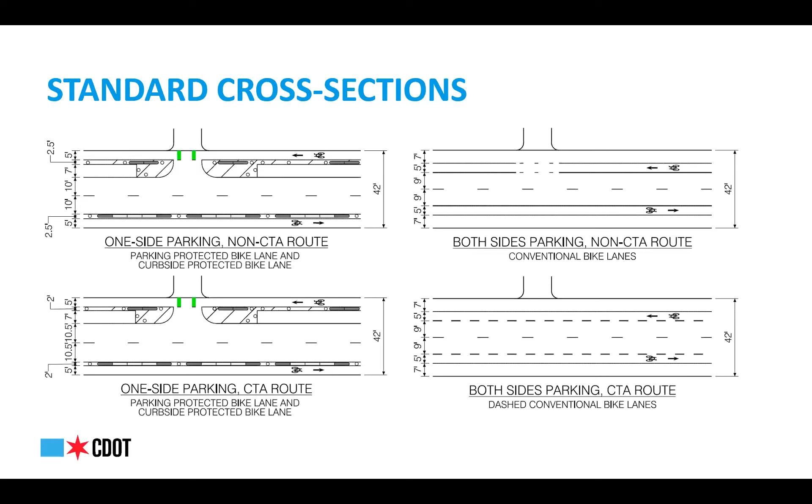Now, you're all transportation engineers. This is probably the easier part of a street where it's straight and nice and easy. It gets a little more complicated when you hit an intersection. And so this is an old standby. It's been in our existing standards. So we've revamped it a little bit. It's just sample intersection design. So this is again classified by different street widths.

Now, no intersection in Chicago is going to look like one of these. First of all, because most of them don't have this exact geometry and this exact cross section, but also because the goal of this is not to say this is exactly what you should copy and paste and put right onto the road. This is to say, okay, here are the elements that work in this size of intersection, this type of intersection. Choose which of them make the most sense for this context.

Maybe the bike box, like you see in the bottom here, makes sense on both approaches to the intersection. Maybe it doesn't make sense on either approach. The goal is that you can see how that interplays, how that's going to work with other elements.

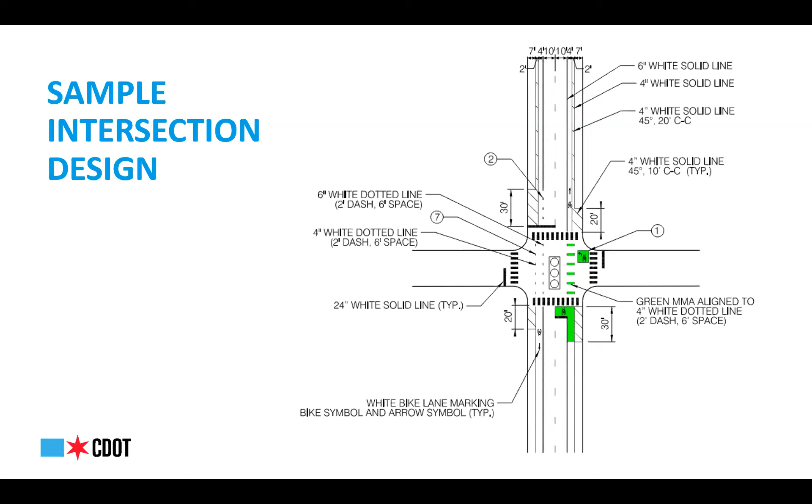And then, as I mentioned earlier, MOT is something that we've been talking a lot about this year. On the left, you can see that there's a project that was mid-construction here. So paint's gone down, but concrete's not in yet. And I live pretty close to this street. A lot of people use it all the time. You park the way that you've always parked, right? These lines, they look kind of wide enough for me to park in. I'll just park in that. Well, I know that that's supposed to be a bike lane, but it's not quite clear to the average user. And so we want to look through, okay, how do we as engineers set up our projects for success even in that interim period by creating good MOT standards?

So the diagram that we've drawn up and are going to start implementing specifically for parking protected bike lanes just includes putting barrels spaced evenly between parking and bike lane, just to delineate that space better. If a car is trying to squeeze in between those barrels and the curb, it's like 5 feet. So good luck with that. We also want to make it really, really obvious, right? The parking chalked onto the parking lane makes it clear. You drive for the first time, you're like, wow, they just repaved this road. It looks great. Look at all this nice new paint. Oh, I park there. It says parking.

Nice and easy. The other thing I want to point out is the notes here. We've included this note on a couple of different sheets, and it's just that temporary traffic control devices should be present from the beginning of construction all the way through the installation of signs and pavement markings. That's to avoid that interim period where there's really no guidance, where most road users are just going to treat it the way that they used to, even if it's completely striped differently. And so keeping these from the very beginning until concrete gets poured will really help that confusion and lead to project success as we move forward.

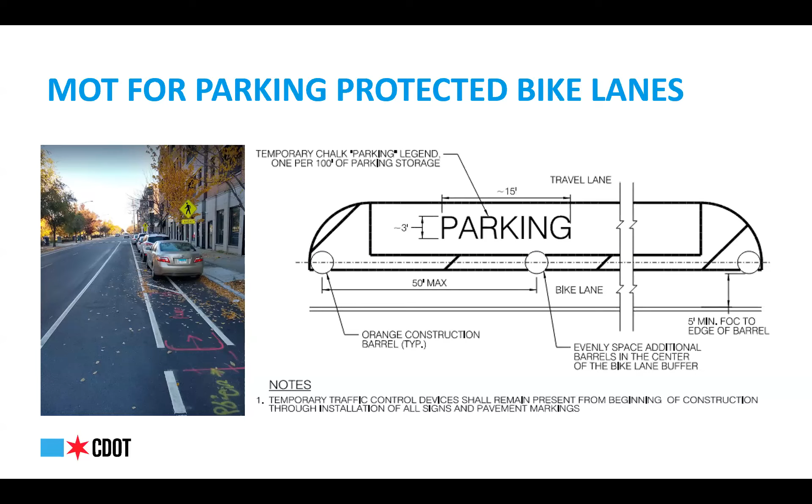As Kurt mentioned, the MUTCD is a big part of the guidance that we talk about. One of the ways that we've interpreted the MUTCD in the past, we've clarified and had some real discussions on internally, and that is the delineator color that we use on facilities in the roadway.

So the MUTCD says that flexible delineators should reflect the color of the pavement marking they are meant to complement. So what that means is for separation of traffic in the same direction, delineators should always be white, like you see on the left, where the pavement markings would also be white.

Where traffic is in different directions and you're delineating that separation, it should be yellow, like a pedestrian cut-through or any other like bike, maybe a two-way bike lane or a contraflow bike lane where there's car traffic directly opposing adjacent bike traffic, and those should be yellow.

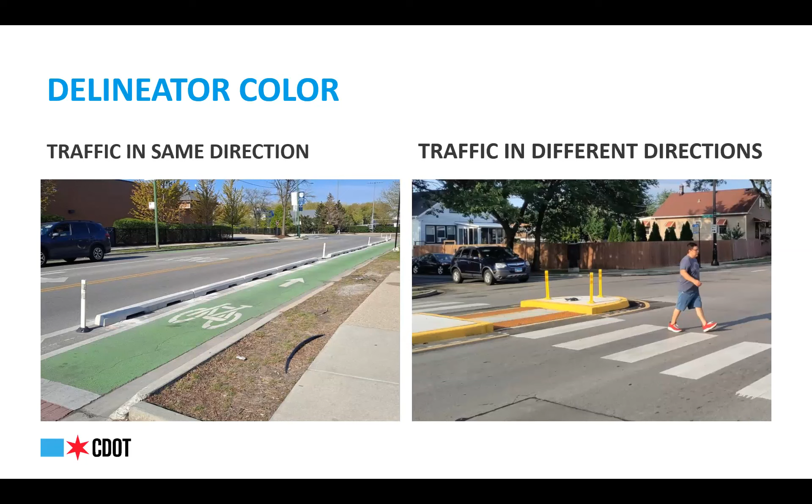Pass it off to Colin.

Okay, so I just wanted to talk a little bit about what neighborhood greenways are before we talk about some of the changes and expansions we made in our guide. So neighborhood greenways are streets that are pretty low stress, low traffic, and they don't need protected bike lanes. So the three that we have here, the shared lane markings, contraflow bike lanes, and one-way bike lanes are pretty standard treatments that you would see on neighborhood streets. In our guidance, we have information about wayfinding signage, typical signs, dimensions, and pavement markings for neighborhood greenways.

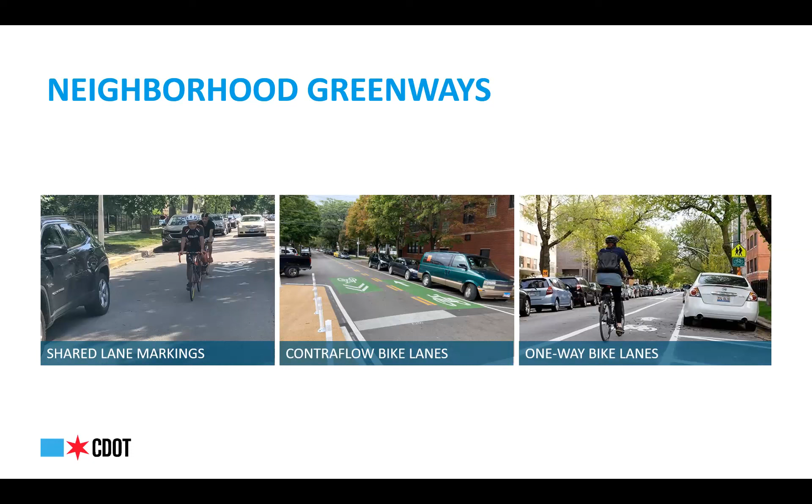One of the neighborhood greenway types that we've expanded our guidance on is the advisory bike lane. So advisory bike lanes allow for two bike lanes to be striped in both directions on the streets, while at the same time providing them on low volume streets. So if cars were driving down that center lane and there's no opposing traffic, everything is just fine. But if a car was coming in the opposite direction, cars could easily, carefully move over into the bike lane space and pass each other.

So in our guidance, we have provided information about the width of that center travel lane, the typical ADT thresholds for using advisory bike lanes, and what to do at intersections. Just wanted to point out specifically that at major intersections, most likely we are going to be dropping our advisory lanes in favor of shared lane markings.

Also, regarding neighborhood greenways, we've provided guidance on the types of speed humps that should be used for these types of streets. So sinusoidal speed humps will be used as a bike-friendly traffic calming option.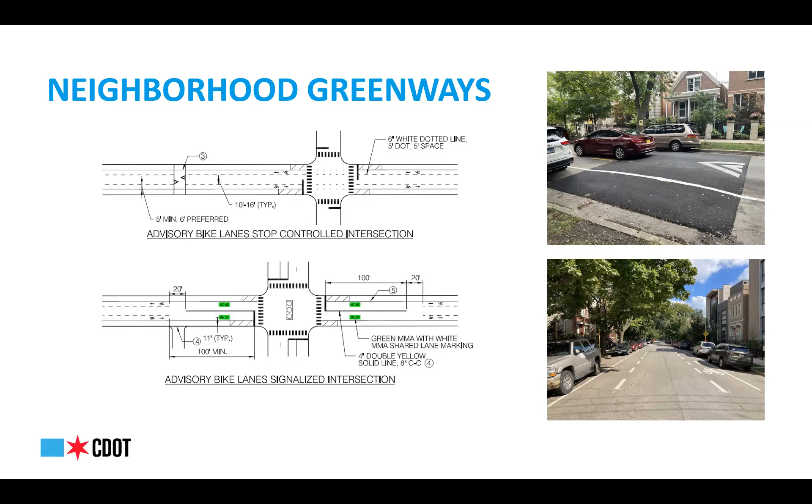It's easy to guess that just adding bike lanes to a street is probably just one more mode that's competing for the already crowded space on Chicago streets. But we don't want to improve things for bikes, like adding protected bike lanes on Belmont, while at the same time totally breaking down bus travel times. So for example, on Belmont, we provided some capacity analyses that showed us which segments would be best benefited by combined bus bike lanes or just bus lanes in general.

We've also provided some more guidance on our mixing zones. So mixing zones are where cars and bikes cross paths, and they can typically be some of the most confusing things to design. Our typical standard mixing zone of the 30 feet approaching the stop bar is something that you'd probably see on a minor intersection.

But the other two to the top that we have here are just general guidance. They're giving information on tapers, dimensions, signage, but realistically, in the real world, each intersection is going to have something unique about it, which might mean that these are going to be very different from what you see here. Ideally, the general goal with the mixing zones is to provide protection for as long as possible up to the intersection and creating the shortest mixing zone feasible.

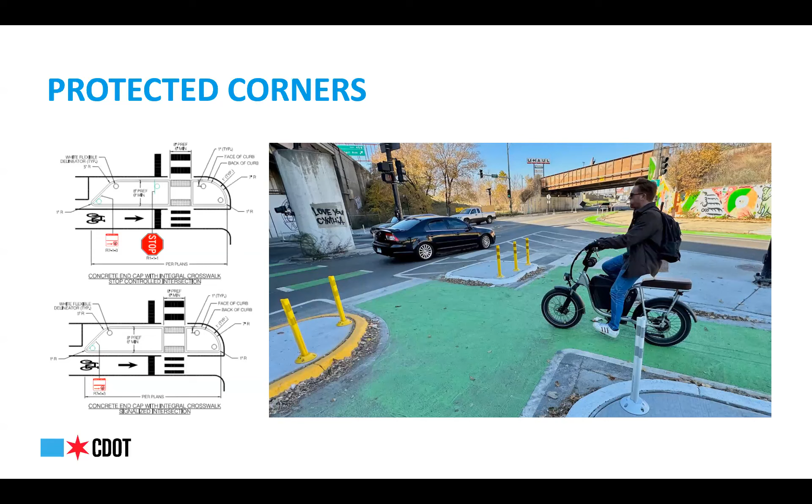And as we touched on earlier, there are two different main types of concrete we use, the cast in place and the precast. For cast in place, we've expanded some of our details in the design reference manual, and we're going to also be calling out that the minimum width for excavation is 2 feet wide for the cast in place, which is something that has come from lessons learned over the last 2 years as well.

And then for precast, there's 3 types, 1, 2, and 3, as Kurt talked about. And then each of those have subtypes based on if the ends are rounded or not. And you'll see those in the design manual as well. And the biggest thing that you'll see here is the lateral clearance placement. And all of these have different lateral clearance, 7 feet, 7.5 feet, and 9 feet, depending on the type of concrete.

And this is important for many contexts, but one of the biggest being maintenance. Our mini snow plows and street sweepers have certain minimum widths, and that's why we have to keep a lot of these minimum widths here.

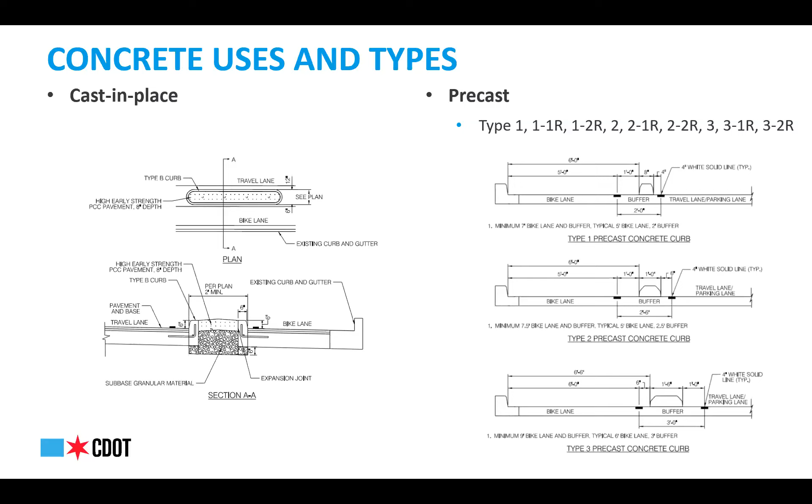So that's the main portion of our event. We are going to wrap up with question and answer. We'll start with in person, if that works. Does anyone have a question? Is there any guidance for the bike signal required?

Yes, actually. So that wasn't in the presentation, but we've been working on it, and it's really adapted. I'd point you, until we do send this out, to the MassDOT Separated Bike Lane Planning and Design Guide. They have a really good section in there on when a protected intersection versus a mixing zone versus full signal separation is required. We have modified those standards from Chicago-specific projects and lessons learned.

So we will have a section, I think it's appendix B or C, but we will have a table that really provides some guidance on where signal separation is required. It's really based on the number of turning vehicle volumes across the bike lane, and also whether the bike lane is one way or two way, and whether those turning movements are left turns across a one-way bike lane or right turns, and whether you're across multiple lanes. So a lot of different things to consider, but it's all on the table. We will share that. When will that be? Hopefully soon.

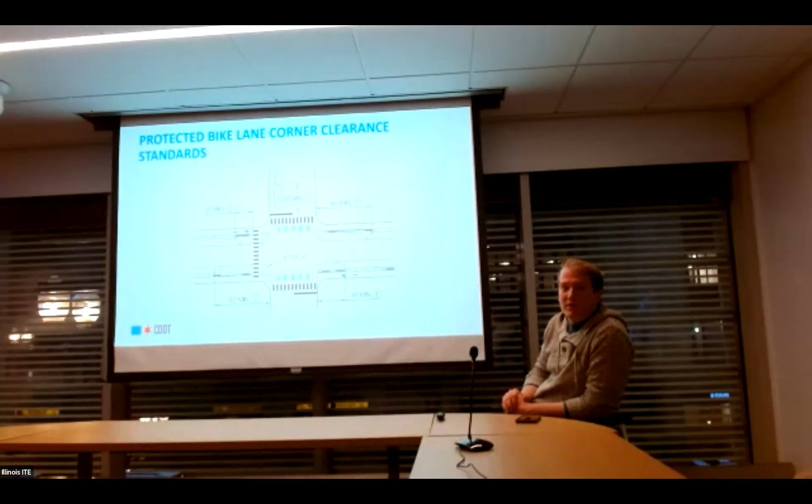Okay. So the question was on clarification on the protected bike lane corner clearance standards. This actually specifically came out of some conversations and observations on some of the parking protected bike lane projects that we had installed this year. And one of the things that we saw is that for this standard here, we had originally used 40 feet. And this came a little bit from that MassDOT guidance I mentioned before.

But we found that there's a lot of variation in where the curb ramps and the crosswalks fall. And there's a lot of variation in the amount of visibility that a motorist actually has here based on how far back this crosswalk is, how far back this stop bar is, whatever land use is here, whether the building is built up all the way to the right of way.

And so we had a couple options. One is, all right, we have some sight triangle standards that go into doing an observation and calculation every time, on what, based on how far back you are as a motorist, exactly you can get away with. But the fact is, 40 feet wasn't enough in a lot of situations.

Just anecdotally, talking with people who were driving on the street and turning, they felt like they didn't have enough time to see a bicyclist when this was only 40 feet. Bicyclists felt like they couldn't really see motorists for long enough turning on the street. So there's a lot of feedback there. And 40 to 60 feet is what fell within all the existing guidance that we saw with other cities.

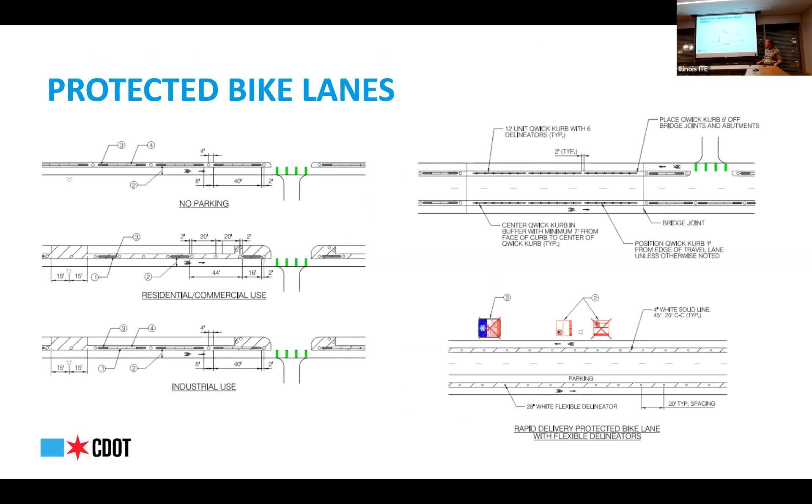And so given all that feedback, we decided to settle on that larger corner clearance standard specifically for protected bike lanes for that reason. That's where that 60 feet comes from. Far side, 30 feet. That's just because you don't have bicyclists coming in the opposite direction. You don't need to worry about that left turn visibility, so you're able to shrink that down to 30 feet. You don't need the same 60 feet. You don't have any fast road users coming in that direction that you would need to be worrying about. So that 30 feet is specific to far side.

And then the 20 feet beyond a crosswalk, this is standard whether it is a protected bike lane or not. So that's a common standard. We just wanted to have a standard here as well in case there was a location that did not have a crosswalk, which has come up a lot on some projects. And with the 60 feet, do you recommend it for all intersections or just signalized? So this is specific to uncontrolled intersections, right? Yeah, there's going to be a table in the design reference manual that lays out the type of control, whether or not there's a crosswalk and a stop bar.

Anything real quick before I get to you? I want to make sure, anything on the virtual chat? Yeah, we have a bunch of questions. Okay. Do you want to look through and curate those? I can take one more and then condense some of these together.

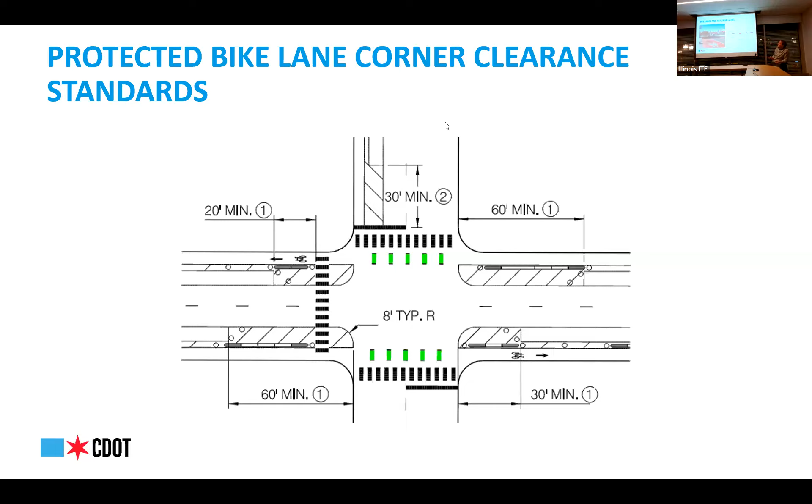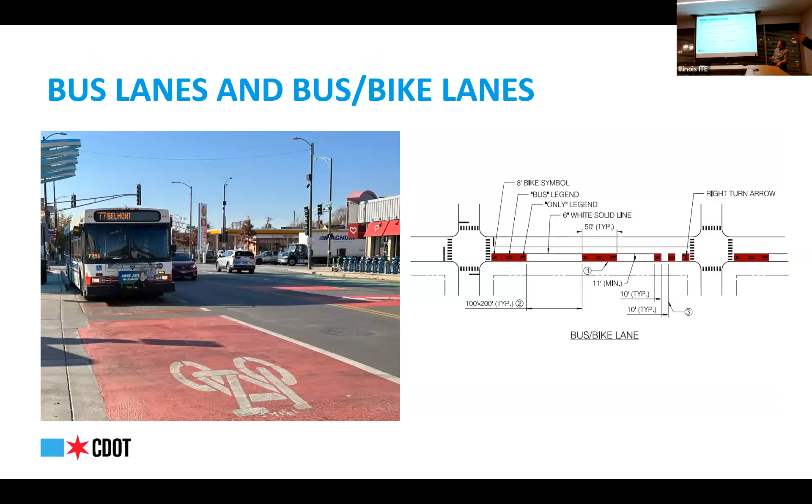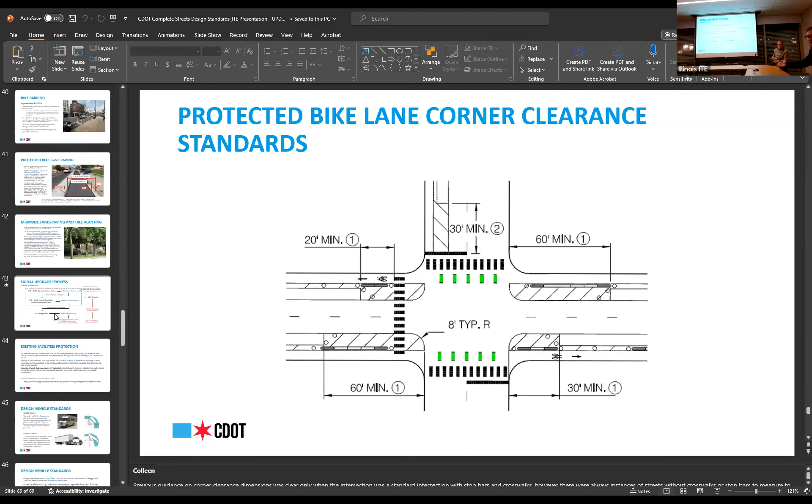As long as people are listening, I think the point is, these are important things to submit for the process, but it might not be everything, right? If there are auto turns that have to happen, that goes in with your TSR. If there is a new signal that's getting built, submit the study that went with that. Timing sheets, you need a Synchro file to build your timing sheet. You need your crosswalk stuff. You need volumes. Just saying that it isn't just the standalone document. I feel like I have to just say it. So, thank you. Yes. Thank you for that clarification.

We'll take one of these webinar questions. With the shift to rubber speed humps versus a combo of rubber speed humps and Qwick Kurbs, are we concerned that the efficacy of the left turn hardened center lines will decrease, particularly if snow is involved? So questions on the speed hump versus using the bollards along with left turn traffic calming, is that right? Yes, Sid can speak to that too if you need. Sure.

I think in general, these are all pilot locations that we're currently evaluating. So in terms of efficacy, from preliminary observations, we have not seen much of a difference in how well these left turn traffic calming locations are performing in terms of slowing speeds, vehicles taking left turns, and limiting the amount of pedestrian exposure at the intersection. So I don't think that we've seen, at least with what's out there right now, any change in efficacy between just rubber speed bumps versus rubber speed bumps and Qwick Kurb with bollards.

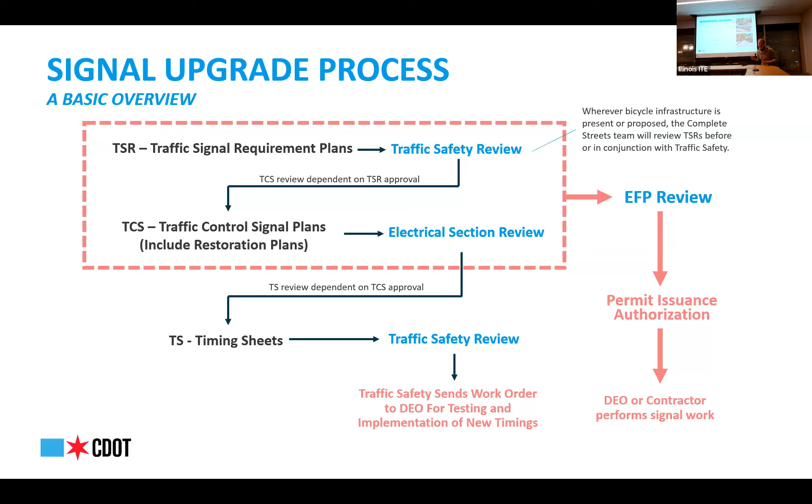Details in the guide. Thank you so much for listening.